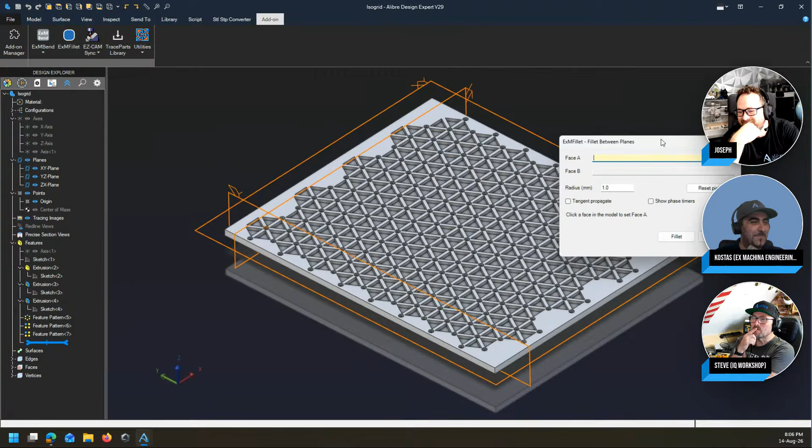Well, it's not, and this is the first add-on I'm going to show you. By the way guys, please do not judge - these are all vibe coded, right? This is Costas vibe coding with Claude. The way this works is you open it up, this is pre-selected, you click on a plane and it selects it, the yellow bit goes down, and you click on another face. Basically you click on faces and it creates planes out of them, then you give it a radius, and then you click fillet. What it does is it creates planes out of those two faces, and it only fillets edges that start at plane A and end at plane B, and ignores everything else. Every other edge gets ignored. And the selection strategy is mine, it's not Claude - Claude made the code.

It ran for about 45 minutes for this fillet. It didn't work really well.

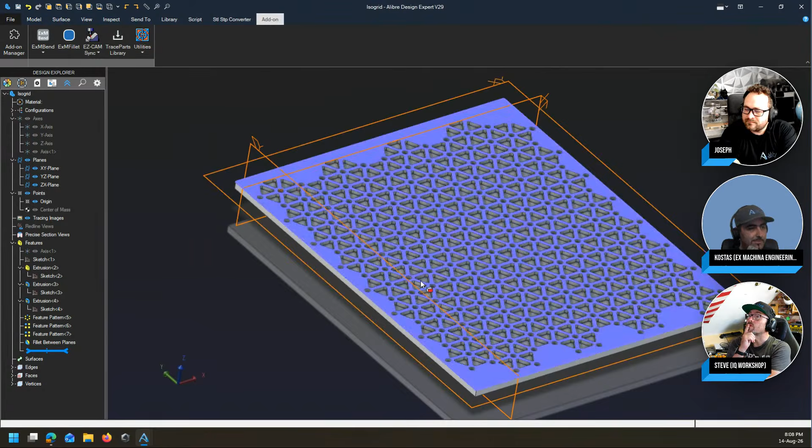Yes, molds, of course. And then you can do multiple passes and select different planes. But for most basic molds, this will work like a charm, and we get to showcase it with a cool isogrid.

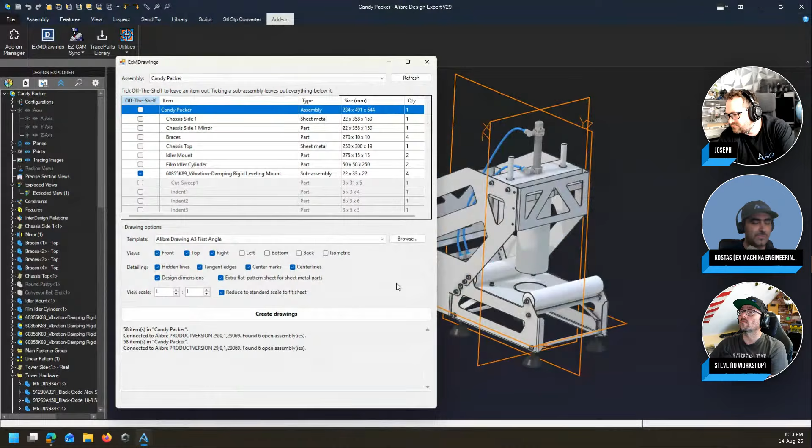Go to general, you have this, which is treat as part in bill of materials when used as a sub-assembly. So for all of the parts that you've toggled this on, this add-on knows and designates them as off the shelf and doesn't make drawings about it. If you want, you can revert that, and then the constituents of that sub-assembly become available. So I'm telling it that all of these are off the shelf, I don't want...

Okay, this is an entire sub-assembly. I don't want to be making drawings of these. These are the pipes, right? These pipes were made with the same method I show in my 3D Sketch Masterclass.

So I tell it what is off the shelf that I don't want to have drawings of. Then I click Create Drawings. And we're streaming, so it might also take a very little while.

And while it takes a while, we've got someone from Eastern Washington. You know, my wife's family is up in that area, so it's near and dear to my heart. Welcome to the chat from Eastern Washington.

So, Costas, what is the target user for an add-on like this? If I'm terribly honest about it, these were made to speed up my work, to speed up the way I work and I produce work and deliver to my clients.

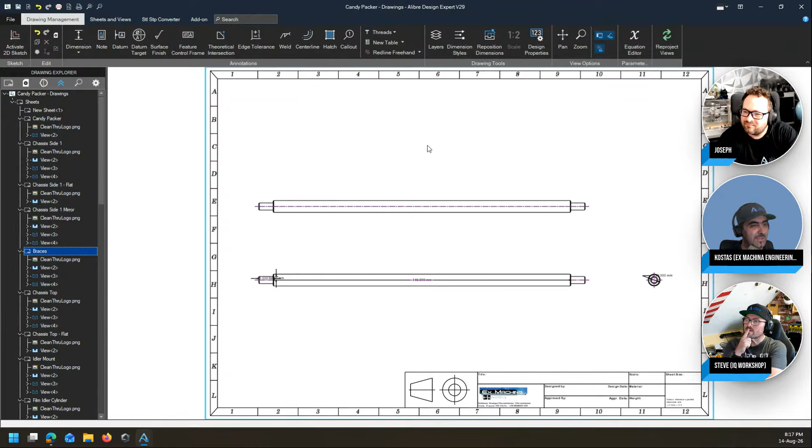I forgot one. This is an off-the-shelf part that got made, but so the idea, the way it makes it, is you get the assembly, and then you get parts. And then when you have a sub-assembly, it makes the sub-assembly and then its constituent parts, and it moves down.

And this scale function has never failed me yet, even though, funnily enough, the dimensions don't go in very correctly, but you can see that the scale it selected is correct to fit the A3 sheet that is my template. And this is the 3D part, and this is the flattened part. Okay, and it goes on, and yep, there you go.

So that is the drawing add-on, right? And just to give you an idea, I'll be making a video, which is, by the way, already made and uploading about this add-on. This just made, in the span of our discussion, made 26 sheets of all of the parts with design dimensions.

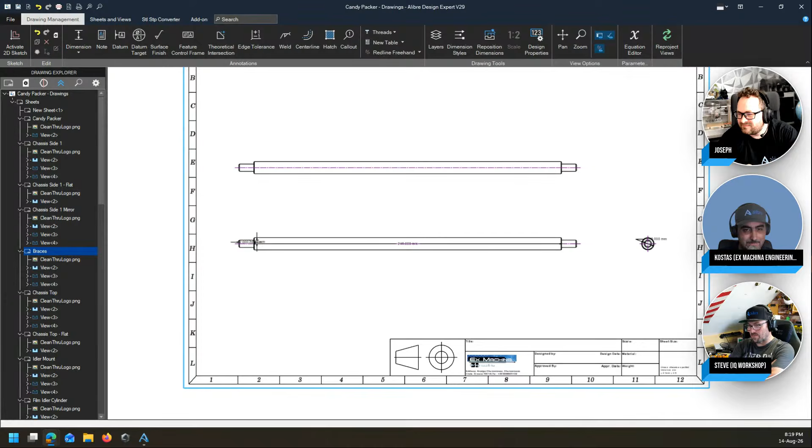Okay, so I mean, it's worth something. Wow, right? So you were saying V25 and above for Alibre? Yeah, V25 and above. Now the only reservation I have is this.

It prints the bend notes, and bend notes are a V29 feature, but these were not put in by any sort of code that was generated. So I'm guessing that if you use this in V25, 26, or anything, these will just not appear because they're not there.

But I'd love people to give it a go, give it a test drive, and come back with comments, and help me make it even better for them and for everybody else that is going to be getting this add-on. Okay, so just to close out the version question, Costas.

So yeah, is that Atom, Expert? Right, so that's a very good question. Atom does not take add-ons because it doesn't have script, and the API are not, to my knowledge, enabled in Atom 3D. So this is a Design Pro and Design Expert. I don't know if Joseph has any more insider knowledge on Atom 3D getting add-ons, but yeah, so this is how this works.

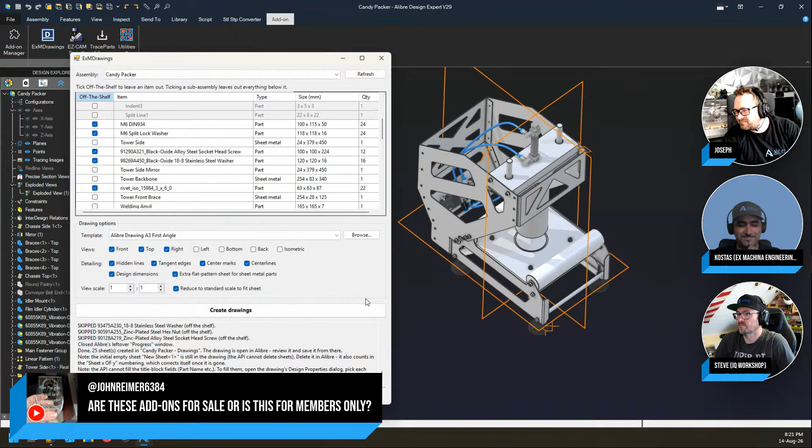It appears that it's slow, right? But in order to make 26 sheets and adjust the scale on them, that's about half an hour of work. Whereas this took like what? A minute and a half, 2 minutes. For 26. Okay, then we had a question: are these add-ons for sale, members only?

How would you structure that? Okay guys, these are not for sale, right? So I'll be building up a catalog of these add-ons. Currently there are 3. The third one is la pièce de résistance.

You sign up for a top-tier membership in my channel, and you can download the entire catalog. Next month, if you don't want to sign up, you get to keep what you already have. If there are new add-ons next month, you won't have access to them, but you might wait a few months and then get the new catalog. These are a bit of work to make, but I felt like they actually add a bit of value, and I also wanted to help people. So it didn't sit right with me to lock it behind subscriptions and stuff.

You sign up for the top tier membership and you download the entire catalog. There are 3 tiers. First tier gives you 1 week advance videos. Second tier gives you any resources I use in a video, so spreadsheets, PDFs. I have a zip file uploaded for tier 2 members, and it even has an entire dissertation on cutting forces, which is pretty deep if you want to go into that - cutting forces in milling, to be exact. But that's the idea: you sign up for a month, you get what is allowed for that tier. And if you don't want to sign up ever again, cheers, you helped me for 1 month. I appreciate it. You get to keep everything.

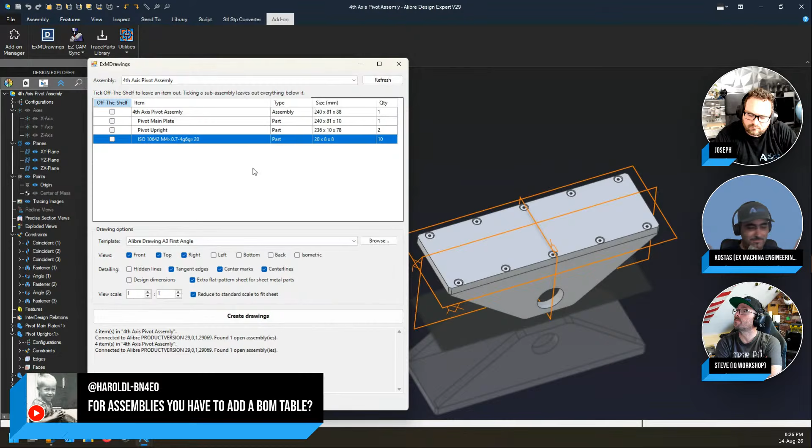So what my add-on does is, and this was 3 parts - you see, it flashed like instantly - it selects this off-the-shelf checkbox when you have checked 'treat as a part' in the bill of materials, but it is a pre-selection. You can go there and deselect it if you want as well. So nothing is final.

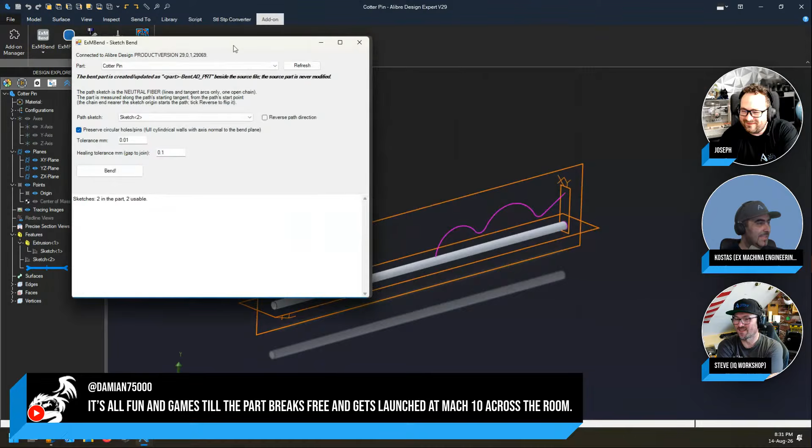Okay, so it's got a few options.

Most of the time, you run it without touching anything. It picks up on the two sketches available in this part. The pre-selection is the last sketch, sketch 2, which is this free sketch. You get a tolerance and you click bend. Then you wait a while - admittedly, not that much. I love the exclamation on that button, it gives the whole thing a touch of personality.

Oh, where's my... okay, it keeps bringing up my screen, guys. So give me a second. You get a little message box saying your bend is complete, and I need to regenerate.

This is our part, bent. But that's not really impressive, is it? So let's push it a little bit further.

Let's go ahead and take this SBR rail - yeah, this is the one I want. This is a production one, I don't want to mess that one up. So this is an SBR rail, right? It's got counterbore holes, so this is a shaft rail, a shaft guide. Yeah, there you go.

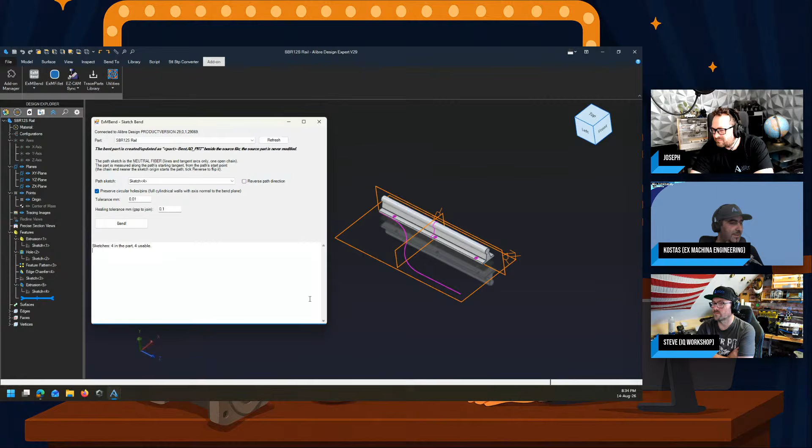Okay, so let's think about this. If we bend this, the hole here is going to get twisted all out of shape, and it can show the holes twisted - it becomes like a triangular hole. But you might want this bent, and you might still need it to be bolted down somewhere. So there is a toggle here that says preserve circular holes and pins, full cylindrical walls with axis normal to the bend plane.

The bend plane being the plane of the sketch that we're bending around. So this is sketch 3, the free one - I need to be bending around sketch 3. Let's see what it does now. Sketch 3, okay, and I'll bend. So this we are streaming, it'll take a slightly longer amount of time, but you'll see there are added features here. Okay, we're bent - let me show you the result.

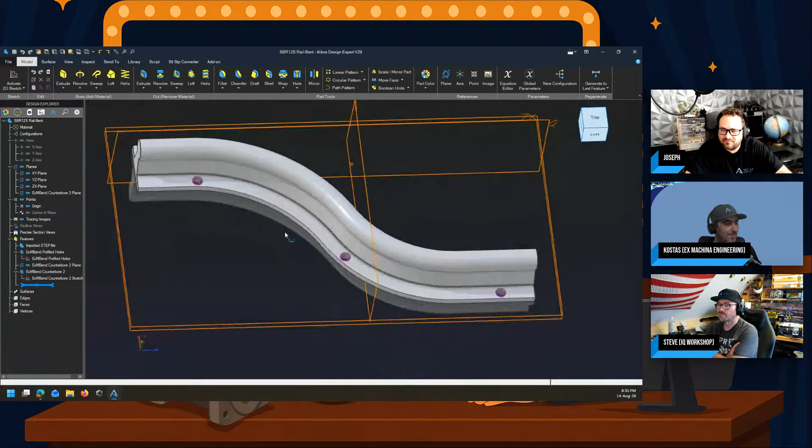So what it does is it bends the centers of the holes, and then it goes in and remakes the holes with features. So there are two cut features here, and you get your bent part with the holes correctly placed. So if I get you - you're making holes that are not distorted in the bend.

Yes, because otherwise, exactly - the way this works is it is a volumetric bend. That tolerance you see is the distance between points; it turns this into a point cloud, essentially. And then it goes in and executes a homogeneous transformation on each point, translating its coordinate system along the sketch, and that's how you get this.

If you do that on the points of this counterbore, for example, it'll be like a slanted ellipse. But by clicking that toggle, you tell it to plug that hole first, remember where the center was, do the bend, then make new holes.

Okay, and we have more. And we have more, guys - you have more? Because we have more. Please, sir, can you have some more? Yes, don't mind if I do.

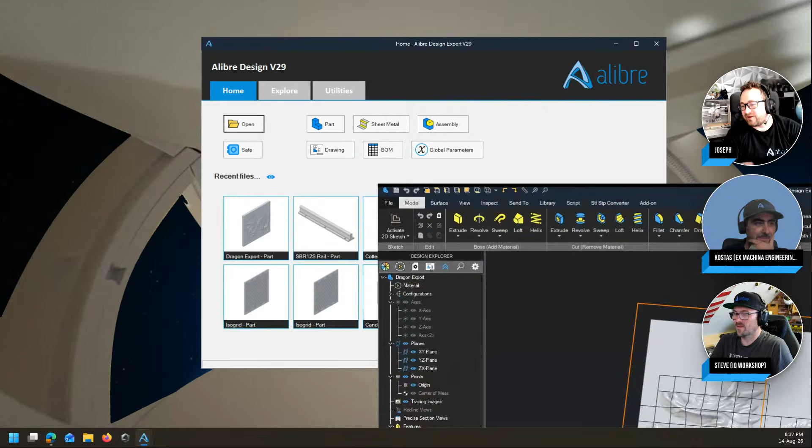I have some videos on the Alibre channel of how to make a tire - we're obviously making the tire in the round, and I think I made two different methods for that. It's a lot to account for features on that circular path, so I think what you're going to show us is a real treat that solves some of these problems. Yep, that's the entire idea.

Okay, so let's go for - where's my... don't tell me I deleted it. The joys of round, the joys of live things. Yeah, here's a question: can you make this into a flat pattern after? That's kind of an interesting thought.

What do you mean? Make what into flat pattern? I think what they're saying, and John Reamer, correct me if I'm wrong, is if you have something that's in the round, could you flatten it using the same logic? Yes, if you get the math right.

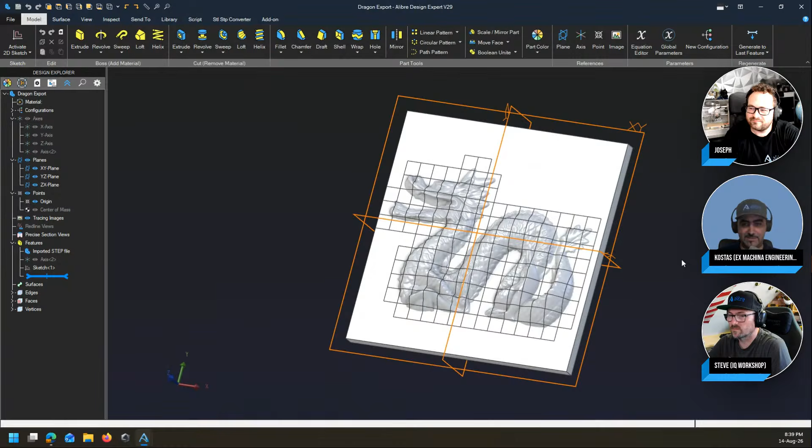Let me point out again that this is essentially an approximation, right? What you're doing is you're creating a point cloud. You're transforming every point in that cloud, and then basically the add-on remembers the engine, as it's called, remembers which points go to what faces and tries to restitch them. So this is not as accurate as the flat pattern in the sheet metal environment.

Let me tell you that flat out, and you will see it in this particular example, right? But I cannot find the tire, so I'm going to do it live. Don't worry, guys.

This is setting the bar high. Difficulty set to max. It's like that one clip. We'll do it live. We'll do it live. Yep, there you go.

Okay, I need this. Let's bring this in. Let's mirror this around this. And we'll do a shallow one. This is not going to be a beautiful tire. It's going to be a tire, right? So I will now thin extrude this.

And let's say that the depth... So this is the length of the extrusion, right? Now, for this to work, this obviously needs to be the circumference of the circle you're going to be building, right? Okay, and after the live I'm going to actually find the tire.

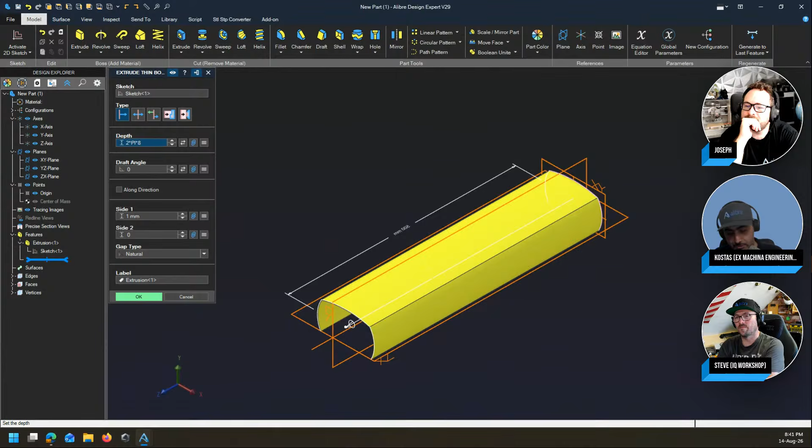It'll be right on the actual tire files. But anyway, let's make a 16-inch tire for a 16-inch wheel. So we have 2 times pi times 8 inches, which is the radius of a 16-inch wheel, right? And then let's make it 10 millimeters thick on the outside. Oh, that was the inside. So that's 0 and that's 10.

Right? Yeah, that's right. And let's fillet these so they look a bit more presentable. 20 maybe should be nice. Yeah, okay.

So now I'm going to make another plane and I'll make it tangent. There you go. And I want the other side tangent to the other side. There you go. Okay, and it's not going to be as beautiful as the sample I sent to Joseph, but let's go, it's a slick.

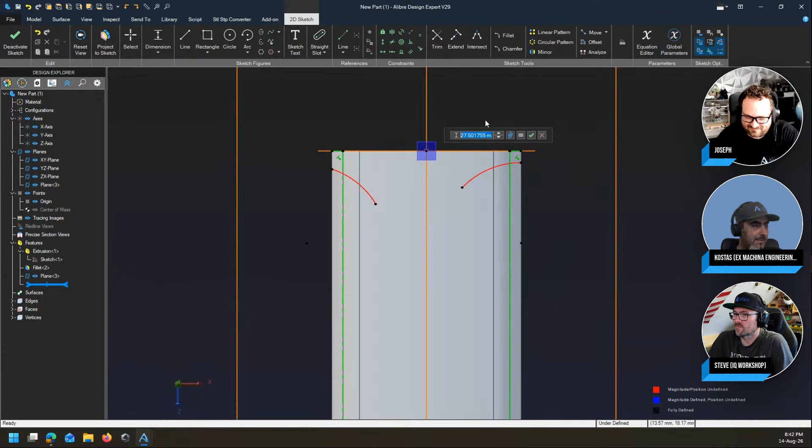So okay, I want to bring these two in. Bring this face in, bring this face in, and I want to make an arc there, and let's make them equidistant from the center. So this is basically a semi-slick, right?

Because semi-slicks have fewer things that I need to design for this demo. Okay. And these two are equal, and they're staggered at 10 millimeters. And this starts...

Oh man, I'm trying to make it fully defined. What's left to define? Ah, the centers. Okay, that's one center. Where's the other one? I see it, it's just right there. Your mouse was on it. There you go, yeah.

So, oh man, okay. So now I'm going to simply do a thin extrude cut, right? And I'm going to go up to this surface and offset it by 2 millimeters. Is that the offset? Oh, it goes to the other side of the surface.

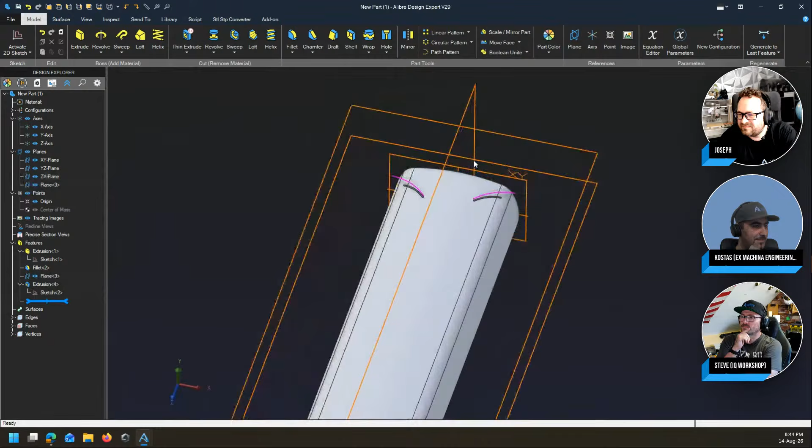Yeah, let's do it like that. Let's make this 2 millimeters. Yeah, this could be a tread, couldn't it? Yep, yeah. Let's be a bit more, let's be even more cheeky. Will it do this? I'm just going to leave these like that. Is it going to cut that? It probably is going to do it, isn't it? Yeah.

And let's get that a bit deeper. Minus 9.5. This is a tutorial of how to make a tire now, you guys. Well, this is the definition of a flat tire.

So guys, take a picture of this, and next time you're late for work, you can send your picture of this to your boss and say you got a flat tire.

How do you get the D's to show up in the measurements? That's a good question. Okay, let me just fix this and I'll show you exactly how I did it.

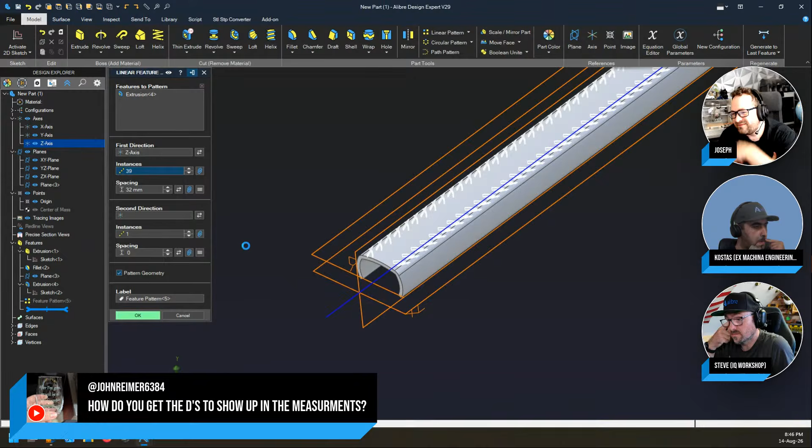Yeah, that looks good. Okay, so how did I get the D's to show up in the equations, right?

So we go into File, System Options. It was System Options, wasn't it? Display, part assemblies, design, viewing. Let me see. It might have been. Would it be under sketching? No, you know what? It was part data. Units. Yeah, you go to units, right?

Dimension, there it is. So part data, which you can also access through file properties. It is this checkbox, show equations. When you tell it to show equations, it also shows the name of the parameter, which is super, super helpful, right?

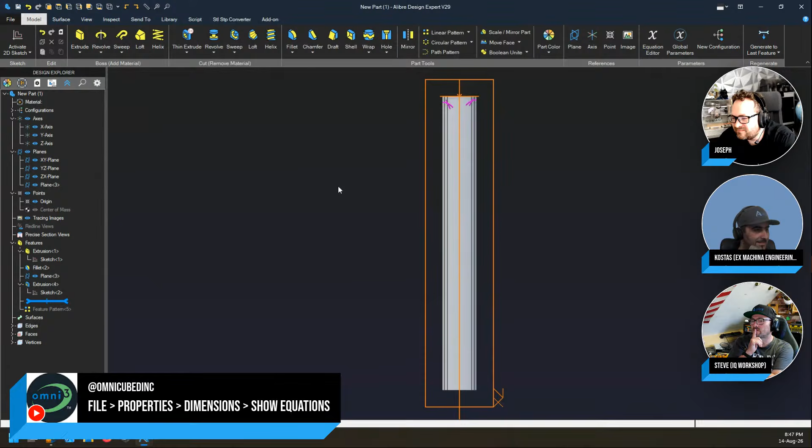Okay, so let's say that this is our tire now. No guys, stop me, this is enough design, right? Okay, so this is our tire. Now we're going to go into this plane, and I'm going to make a point.

So I just started the sketch in the perpendicular plane. I'll make a point here. I will go and project the lowermost edge, and I'll use midpoint with 3 points. So the first 2 points define a linear segment, and the third point is forced to stay on the perpendicular bisector of that linear segment, right? So this is exactly below the middle of that linear segment.

And then I just tell it that this distance - wait, sorry, give me a sec, I got a new keyboard and I'm not used to it yet - is exactly 8 inches. Why 8 inches? Because that's the radius we're designing to, okay?

And after I make this point, I go and click down here where it says insert axis from sketch. And I'll select this point, and what it's going to do is create a reference axis that's perpendicular to the sketch plane, going through that point. I'll apply, close, and close out the sketch. And you see now, I've got an axis here, okay?

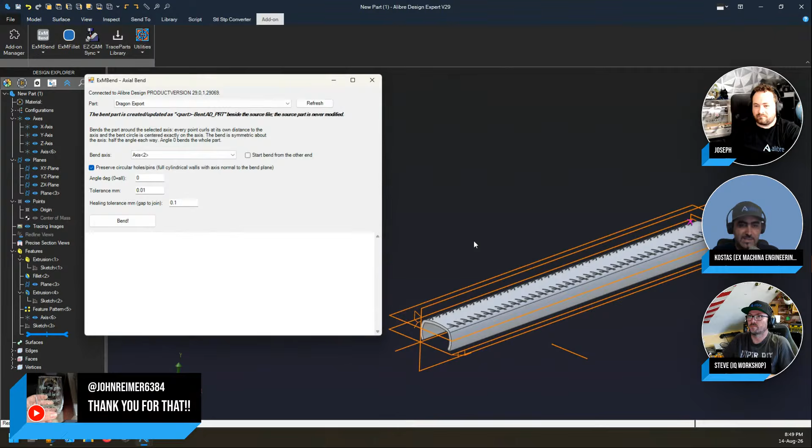So let's go into axial bend, okay? This is a different paradigm - it doesn't bend along a sketch, it bends around an axis, okay? And you'll see that it doesn't take a radius or a diameter as input. That is because the location of the axis defines that radius, okay? And if you leave the angle here to 0, it'll do a full circle.

I can uncheck that, make it slightly faster because there are no holes there. And if I have it checked, it'll check anyway. Let's go, let's see what happens. Did I make a nice tire?

So my demo for this didn't go well, so I'm a bit anxious, guys. All right. Feels like we're spinning the roulette wheel on this. I'm on black, okay? It is kind of like that. It definitely feels like that. It looks like we're bending the dragon. That has to be a euphemism for something.

No, the selected part is the dragon export. Oh, I did, yeah, thank you for that. That's a euphemism for me making the wrong part. Which is a great catch, because up there in part, it gives you a drop down of all the active parts.

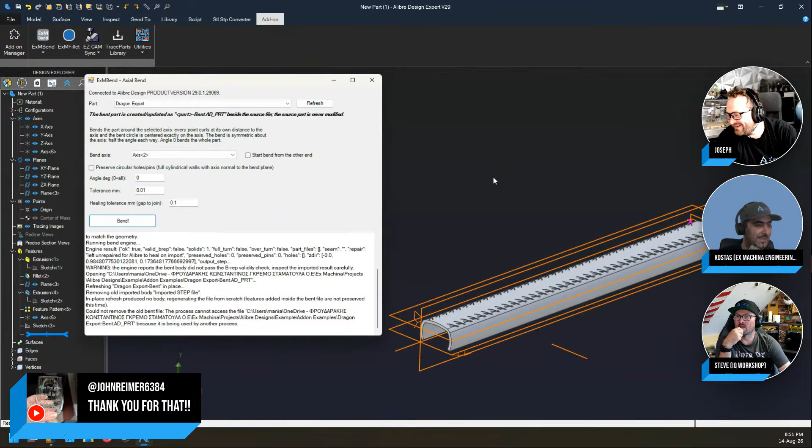Well, if anyone was wondering whether or not we're live, I think we just confirmed we are. We are live. When everything goes horribly wrong, we're live. This is how we do it. But easy fix, right? Just don't get easy tired - fix. I'll rerun it, and then we'll have the dragon example ready made, right? So guys, really sorry for that.

Now I'm intrigued by Bill Black, because Bill Black is from Florida and he's got this really awesome treasure salvage business. And the comment spells tire the way Steve would spell it, right, the European way. So I'm interested to know if Bill Black has spent some time in Europe somewhere, because that's a cool comment for many reasons, but it is a nice way to do some intermediate tire patterns too.

Okay, now that we have the dragon ready for our next show, we'll go for new part. You know what, I should probably save this somewhere. So let's go, tire.

The reason that's saving is probably what tripped you up last time, right? Yeah, and the reason is what this does - I need to rerun it now. So what this does is it puts the bent version of your file next to the original.

Full disclosure, these bends are step files because I'm not Alibre. I'm sure they can make it a feature, but I'm just Kostas. So you get the bent part as a step file right next to it. But if you make changes and rebend it, the step file updates, so if that step file is used in a Boolean later on, that Boolean will update. I checked that.

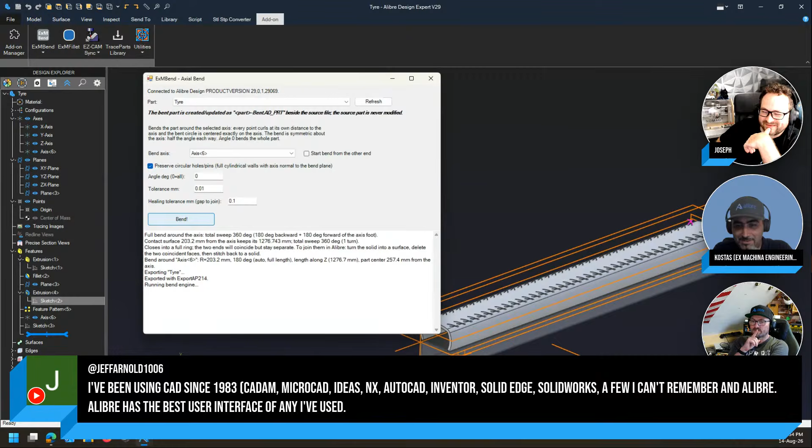Alibre has the best user interface. Yeah, I'll agree with that - best user interface in the business. You know, when SolidWorks started, it was touted as the easy-to-learn CAD. Well, Alibre is like 95% as capable with 10% of the hardness and 10% of the steep learning curve. So definitely worth it.

Okay, we're still running the bend engine. You can't do a live broadcast if everything goes fully to plan - it's in the contract, that's how they get you. It's the fine print, isn't it? It's always the fine print in the contract.

Now we got OmniCubed on with us. I love OmniCubed - there's been a few broadcasts where OmniCubed has come in with some really esoteric knowledge that's been helpful. OmniCubed is at it again, answering that earlier question, if I can find that comment.

We got LGR, oh man, FBS, our regular viewer - welcome onto the stream, thanks for joining us. Hello all the way to Sweden.

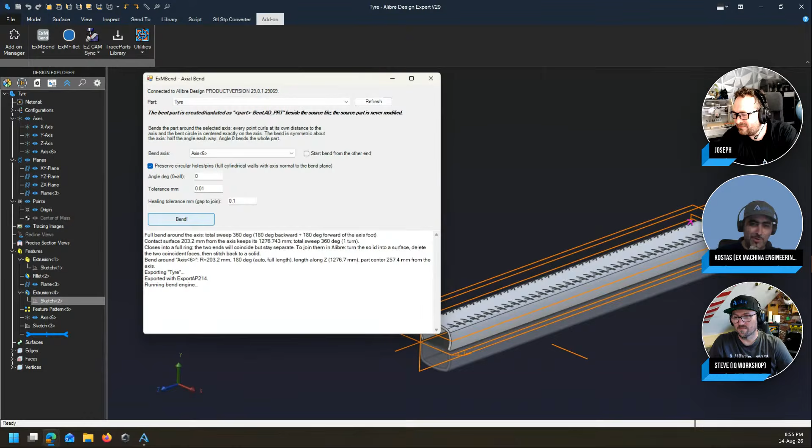LGR FBS made this comment: 'God work.' Sadly, he later corrected it to 'good work,' which I'll take - I didn't see the second one, I only accept the first answer. As soon as you log it in, that's it, it's done, YOLO - you only type that once.

You're saying that about Jeff Arnold's comment, of course, and using that many platforms, it's pretty godly.

Which of course is by this guy - this is the third party. But in this order, you're the second party, right? You're between Steve and I. Yeah, Costas is the meat in the sandwich.

So you see, we messed up because the bend part is created - yep, it didn't work, I made too many things in it. I think we ought to just suppress that extrude cut and try it again. I bet it's probably the cut not lining up or something. Yep, that's it.

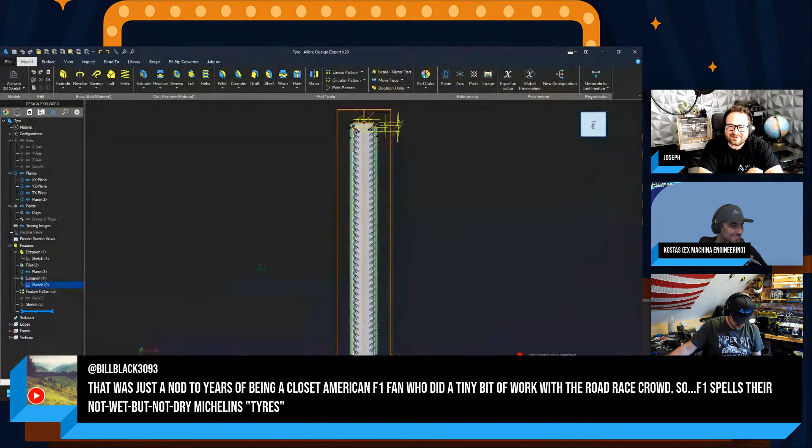So the spelling of tire - we have an answer from Bill. That was just a nod to years of being a closet American F1 fan who did a tiny bit of work with the road race crowd. So F1 spells it that way - not wet but not dry Michelins tyres. And I get it, old habits die hard. I've been to the UK before, and sometimes I still spell things the UK way and have to backspace real quick.

Okay, so let's go to the pattern and make sure that the pattern is right. So let's go like 50 here.

Okay guys, these add-ons are inspired by what Creo does, calling it spinal bend and toroidal bend. I can tell you that you get the exact same issues there, and they're kind of unavoidable, because what we're doing here is some really weird approximations.

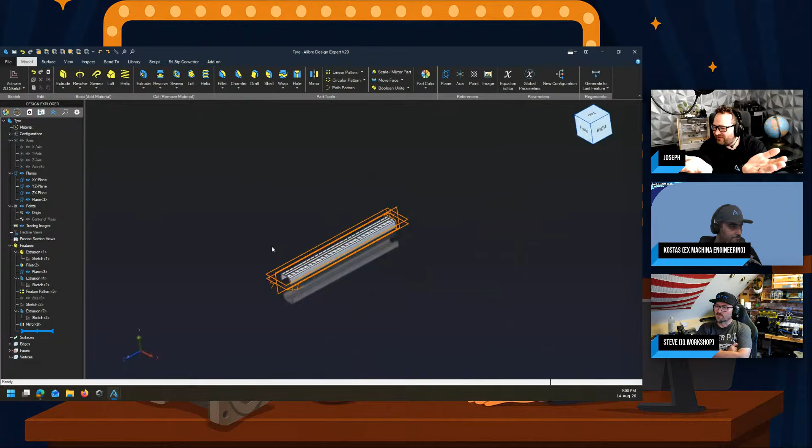So we're doing some really weird approximations, right, and things happen. So let's do it like this and then mirror this, and this should work a lot more reliably. Well, this is pretty fun to see, because when you watch people troubleshoot who have a lot of experience, you can get a lot of things out of it. So it's a lot of fun that way.

Let's try that again. Okay, so we want axis number 6. Let's bend it. Let's bend it like Beckham.

Love that exclamation point on the bend, that just gives the whole thing personality. You know, these were vibe coded with Claude, right? So as I was testing, I told it to make the button there and bend, and I used an exclamation point, it's AI, and it went and put the exclamation point there. So it did what you asked it to. It did, it monkey paws everything, doesn't it?

Let's see, if this doesn't work again guys, unfortunately Joseph will have to show... yeah, I always misspell catalog that way too. So if this doesn't work, Joseph will have to show you the finished previous tire that I deleted, unfortunately. But actually, this was pretty reliable, I'm pretty surprised it failed there.

Well, let's show the original that I have on file here. It failed again, it failed again. What have I done, have I made a hole in it somewhere? I've probably made a hole in it. Yeah, that's the original, guys.

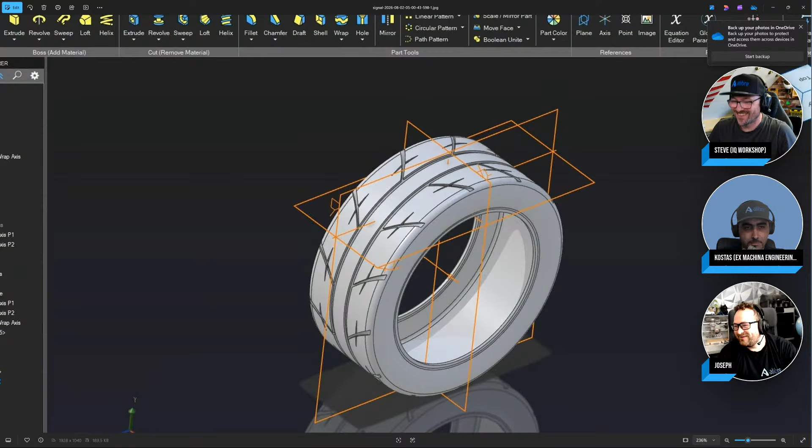So just while we're sorting that out, if anyone's in the UK watching on mobile, you're more than likely fighting right now with your handset because you're getting a UK-wide notification indicating there's a high risk of wildfires. So that's what the noise is coming from, like multiple handsets I've got around me. Yep, I'm literally trying to silence them all. Well, good PSA, don't start wildfires guys. Oh yeah, it's a big problem right now. That's useful.

Well, should we jump into Weldment updates, or do you have some more, Kostas? Nope, I don't have any more. I will be making a very detailed video on how the axle bend and the sketch bend work, and I will address this failure, because I'm pretty sure when I did the extrudes, they were straight extrudes on a curved surface, and I think I punctured the surface somewhere, and the bend closes that hole, and that's where the face count changes and it doesn't match. So I'm pretty sure that's what I did, but I'll address that in the detailed video.

Anyway, that sounds good. And let me tell you, I spell catalog that way too, and sometimes I don't even realize that it's spelled wrong. So engineers may not be paid to spell. Well, if you accidentally get the spelling right, I mean, I'm not going to judge. Yeah, sometimes I spell something and then I type some random gibberish to make sure that it gets the underline because I can't believe I spelled it right. So, yeah, I have a whole...

By the way, can I just address something else? Yeah, these functions... oh wait, we didn't show the dragon. Oh yeah, you want to show the dragon? Yeah, we need to show the dragon, right? Because we actually did it live and then we never showed it, so we need to show the dragon.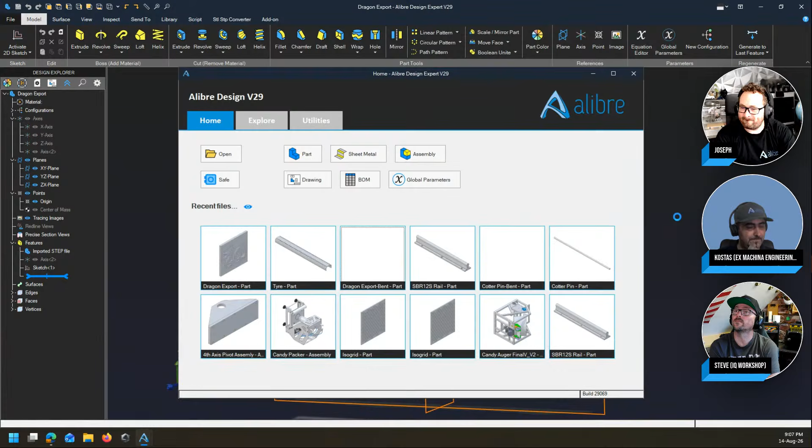So this is the plate, this is a flat plate. If you check this axis out, I need to show my axis. So it's bent along this axis, right? So because the axis is at an angle to the plate, the result becomes a cone, okay? And it just needs to update the face meshes and you'll be able to see it.

You know, in a case like this where you have an image like that, the common thing to do is to make a height map out of it, project that height map onto a bent surface, and then try to use the height map to produce this. So this is a great alternative to trying to use specialized software with height maps.

Yep, look at that cone. And this, I'll be honest, you know where I got the idea? You remember that live where I couldn't make it because I was under the weather a bit, and you showed Relief Maker with Max, right?

There was a question, and he said, 'Oh, can we create a relief on a cylinder?' And Max said, 'Well, no, it's not working, it doesn't work like that.' And I was like, 'Yes, but you can do it on a flat plane, pick up the points, and then do a homogeneous transformation around an axis.' And then I started vibe coding that, and this is what it got, right? Yep, so it even picked up the fact that the axis is off angle a little bit, and it made a cone. So yeah, that's it from the third party.

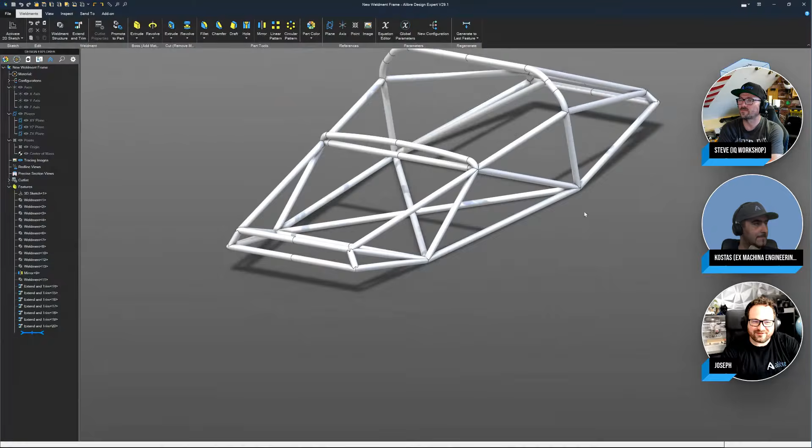So here on my screen, I have some Weldment parts. Here's one frame that I've been working on. Now, we had a schema change since the last time I showed you a 3D frame, so the last frame will no longer open. That's okay, I was expecting that because that's how development goes.

I remade this frame in Weldments. I don't think it's as good as the last one, guys, so if any of you saw the last one, let me know if this frame is totally terrible compared to the last one. But this is what I got right now. And of course, this all came from a single 3D sketch. But this time I made it in half, apart from this one thing that wasn't symmetrical, because now we have some new features where you don't have to 3D sketch the entire thing like we did last time.

This is another frame that was made for testing purposes on the development side. Again, lots of fun to be able to make these. And you'll see some interesting new features - we're going to get into how to make something like this, support gusset, and other things, because there are new features that we have not yet demoed.

I'm going to pull up one other example file. This, of course, was one that I made using the new feature. I know Kostas is really jealous to hear this. In fact, I think I have an even better one.

So let's go into - every time, man, it gets me every time. But yeah, yeah, so go on, go on.

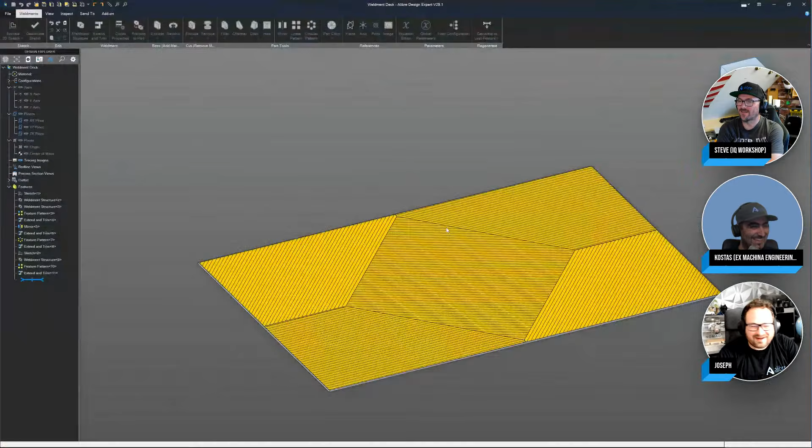I have a deck or a platform that has some patterned surfaces. Just like you, Kostas, I think I had an even cooler version with some little legs and supports, but this one will do. So let's talk about how we can make interesting decks or surfaces like this.

I'll open up a new sample weldment part and kind of outline the general process. First, I can show my planes with Control-Shift-P, and select a plane.

Let's make a deck that has kind of an angle iron outline on it. We'll make it a little bit small so that it's manageable here. I'm going to say 100 - I'm working in inches, but this is friendly to any unit - so 100 by 50, how about. And then we'll constrain that horizontal.

So when I want to add some angle iron, we create a weldment feature, and this works off of the toolbox. You can make a toolbox profile of whatever part that you want to have, and you can make a weldment profile out of that, which is fun to see the updates with.

I'm going to choose an L angle, and I just click on these sketch elements to fill them in with some angle iron. You'll notice now that we have these different points. I can click on a point, and the path that the weldment travels down - the sketch path that I made - when I click this point, the sketch path will be connected to that point now on that weldment.

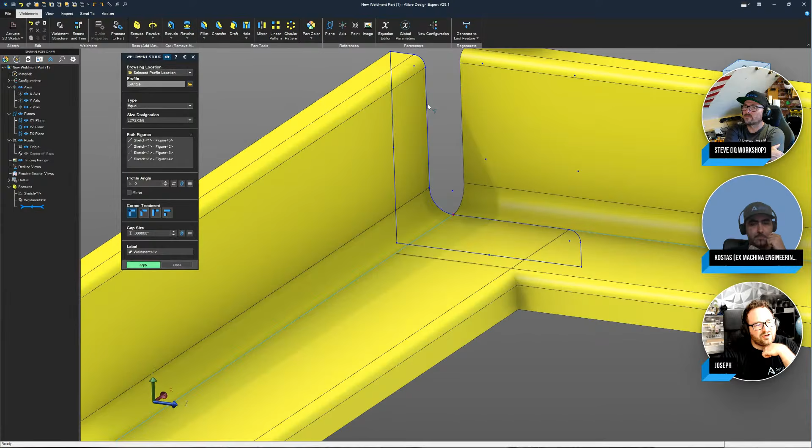One interesting thing that we can do is if we go into the weldment part file - the file that drives this profile - I can add sketch nodes and they show up as these blue dots. So I can add my own custom locations that will be connected to our path to orient this weldment. Let me know if that makes sense in the chat.

That's cool, actually, yeah. So you don't just have custom profiles, but custom locations to attach those profiles to - that is cool. Saw that comment, had to bring it up. Good job, guys. Thanks, Kostas. Thank you so much, guys, it was so much work. Thank you so much, looks like you're going to be getting some subscribers. Be sure to let us know in the chat where to subscribe to. Anyway, a little squirrel moment there.

But so we have the ability to put this profile. I'm going to take the very top face of this flat part and put it right on my sketch plane intentionally, and I'll show you why. We have corner treatments, so we can cut the part so that it stops where it should in the way that we want. I'm going to go with these nice 45 treatments, and we'll apply that.

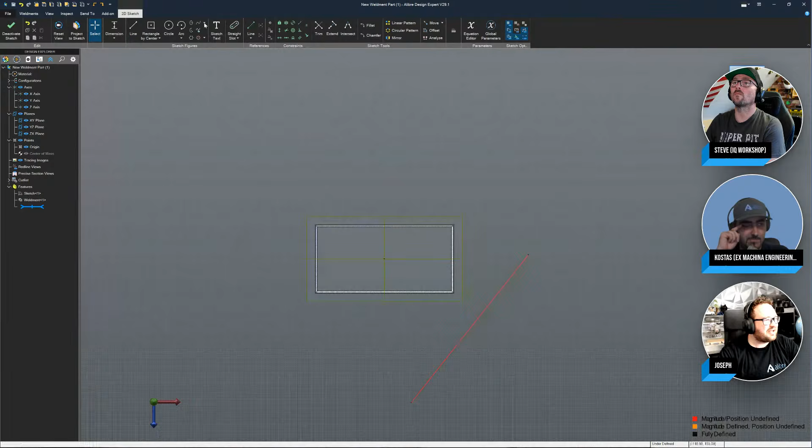Now, what does it look like if I want to use a different kind of weldment profile? I'll activate a sketch on this exact same plane, and let's say I make this somewhat large sketch line, and I'll make that 45 degrees. Yeah, you know what, I think that will do reasonably well. Okay.

I'll make a wood thing since this is going to be like a backyard deck. I haven't actually designed backyard decks before, so if anyone has done that, let me know in the chat if I'm doing a good design or not. I'm totally open to correction here.

I'm going to go with softwood lumber and specify that as my path figure. Clearly this is not the orientation I want, so I can change my profile 90 degrees. Also, something that I don't think was ever shown before, and this might be a brand new feature: I have the option to mirror my profile as well. So we don't just rotate, but we can mirror it, giving us unlimited freedom as to orientation when we create weldments.

That weldment is awesome, isn't it? Can I just say that? It's awesome, it will save a lot of time and effort. I can imagine. Our wood plank is intersecting our angle iron

Our angle iron is intersecting in a way that is totally not desirable. So once again, because I used a point to make that angle iron sit on that plane, I can make this wood also sit on the plane. So I don't have to make many sketch planes or anything like that. We have these options to orient things so we're sitting right where we want to. I'll say okay to that.

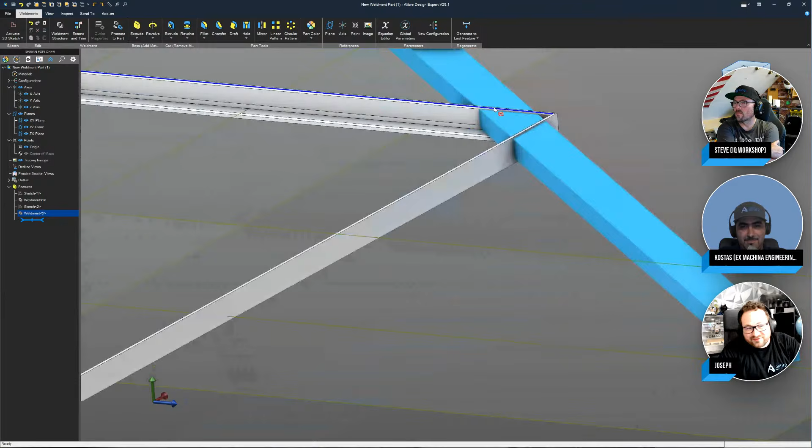Now there's a few ways we can approach this. I think what I'll do is use a trim to trim this plank. I can say I want to trim this body along the plane of this face, and then it cuts it right down to size, right where I want it. This is a brand new feature never shown before: our trim feature can now create gaps, so I can create a known gap between my planks. I'm going to stick with a gap of 0.

But what's kind of fun here... I don't... go ahead. I'm not 100% sure. Guys, if you know, please correct me.

SolidWorks Weldments does have trimming, but you cannot do a custom gap. You need to make planes in those parts and then trim by planes. And even if SolidWorks has it, Weldments in SolidWorks is in the Professional package, which costs like 18,000 euros over here for a perpetual license. So this is a lot of fun - that's 9 times more than an Alibre license.

You'll notice I did not do my homework here, and did not fully constrain my sketch. I'll change the dimensions just a little bit to create a certain condition here. So when I go to reproduce my wood plank, everything looks fine. Let's linear pattern this - this is also a feature never shown before, another new feature in development: linear and circular patterns. I'll take my plank and select this as a feature I can pattern as a weldment, and choose the direction of this edge down here.

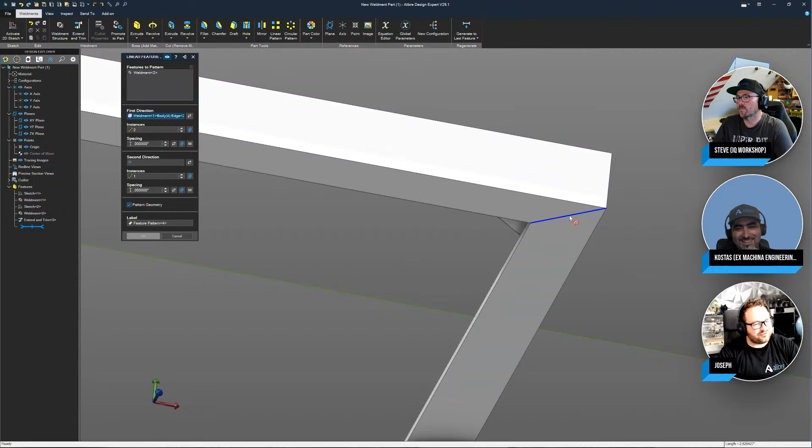I want my spacing to be 3.75, if I remember correctly - yeah, that's about an appropriate gap. So I can start patterning instances. Let's try 15 of those.

Oh man, I think I know where this is going. I'm about to be blown away, guys. If this is what I think, oh man, I know what this is. Oh man, Joseph, I want the Weldments.

So we can accept that, but I can also add the trim into my pattern. Not quite what I was looking for, but let's keep in mind that we can do the trim. There we go - so if I uncheck pattern geometry, we are still trimming on those planes.

Pretty cool stuff. Let me go in and edit my trim, and I can add in perhaps this plane, and this plane. There we go, so we've got something that looks pretty good. I have a few options - I can make my sketch a lot longer so it will be contained within those trimming boundaries I created. But I also want to show you another feature.

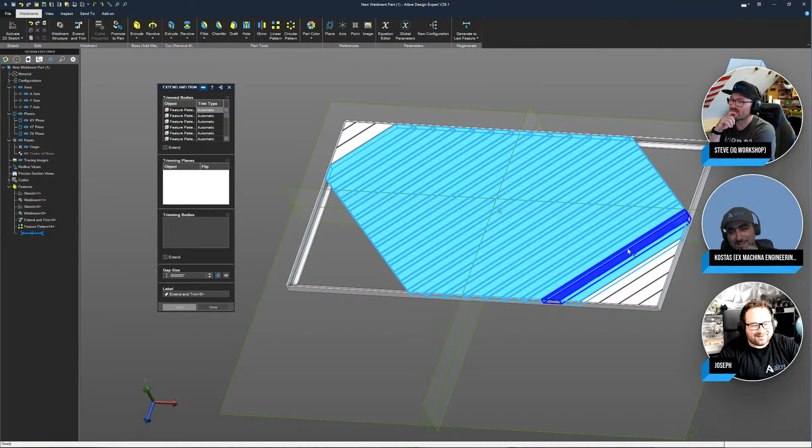So let's do it the hard way. There's an extend option - I can select some of my trim bodies here, and one of the fun and interesting... isn't it great? This is awesome, man, I'm telling you. You've made a table that could sell for quite a few dollars.

Right there, right? Yeah, I certainly didn't go cheap when I decided to use my components. No, you didn't. You did not.

I'm telling it, hey, let's trim these components on these planes. But there's a little Uno reverse card here. I can choose the extend box, and now we're extending to those planes. This really boils down to a multi-body modeling perspective. Alibre hasn't had true multi-body modeling in the past, and we have it now with weldments. So we can start thinking in terms of whole entire bodies and how they can interact and work together in places like this. Very, very awesome stuff.

I'd buy that table. Thank you. I would take the money. Unfortunately, it doesn't exist yet. There you go. Let me check my notes and make sure that I didn't miss anything so far.

One of the cool features is, now that we have a whole bunch of individual bodies, what if we're worried about one of them? I can jump into my cut list, and we can see that we've generated a cut list for all of our unique parts. These highlighted parts all have unique dimensions and are their own. Here we have copies of the same part, and it automatically amalgamates the same part into one item in the cut list, so you don't have to worry about what's the same. It generates a cut list with the quantities that capture those same parts together, saving you some time.

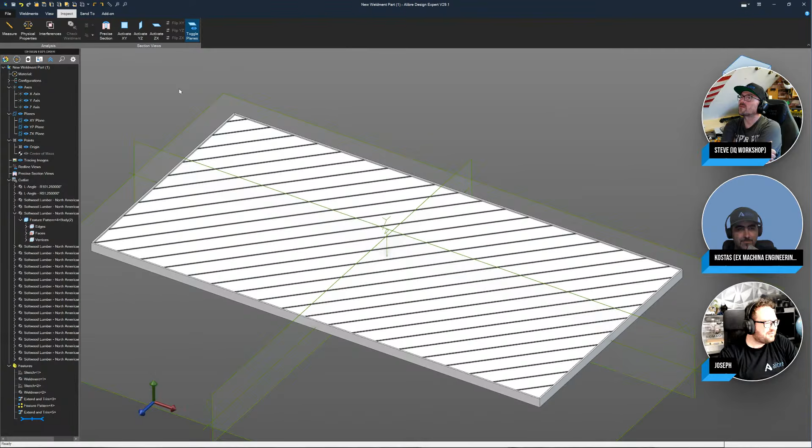I think we still have a check weldment feature. You can just select whatever body you want and make sure that it is checked. This is a development version, so I'm not sure if this check weldment is at maturity or not. We'll see what they come out with, but a lot of cool new stuff coming out for weldments. I think there's a big push to get this released pretty soon, so stay tuned, because this will be on your desktop pretty soon.

This part is pretty cool - this is my favorite thing, if I say so myself. There's been a lot of questions about, well, I love that I can make weldments, but I do need to draw those individual bodies. So we have the ability, this option right here, to promote.

Likewise, if I select a part and go to weldments, there's this new promote to part option. I have to save it, so let's go ahead and save it in my delete folder - we'll just call that a temporary part. With this saved, I can promote this specific body into a part here. They'll say okay.

When I go into there, now I have a driven body, and this is a folder with a bunch of other parts. Let me just filter it by time modified - is it 11? Yeah, it's 11:23.

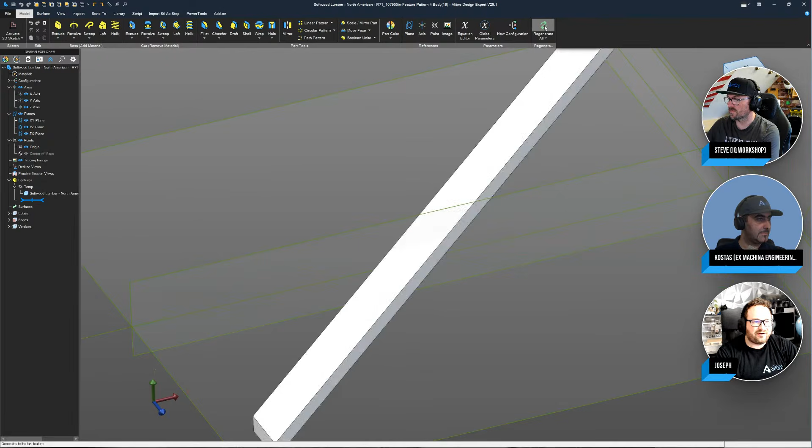So I have this driven body where I can make drawings of it. Now you'll see that it's not showing up here - this is actually a development version bug that has already been fixed, so this is not going to show up for you. In fact, it doesn't show up if you get the latest development version, but right now I'll just hit regenerate all and it shows up no problem. So that is because it's not released.

You're right, we're still crossing our T's and dotting our I's, but we have our individual weldment body. Now, something else that's kind of cool - I can activate a sketch. Let's say that I want to just extrude a hole.

Well, now we can actually do extrude cuts. We have never seen this before in Alibre until this very moment. I can select a target body that I want to apply it to, so I can make this hole apply to multiple weldment bodies - oh man, I love that - or just a few. And when I apply this, I can pattern that hole and so on.

So when I go to promote things to bodies, let's go ahead and promote that to a body here, because this is kind of an important point to make. We'll promote this - oh, and I have to save everything, of course. Alibre is keeping me honest.

So we'll take that body, we'll promote it, and then I have an individual part file with this hole. Something important to point out is this is a driven body. Let's try regenerating it. There we go. So I have my part with my hole.

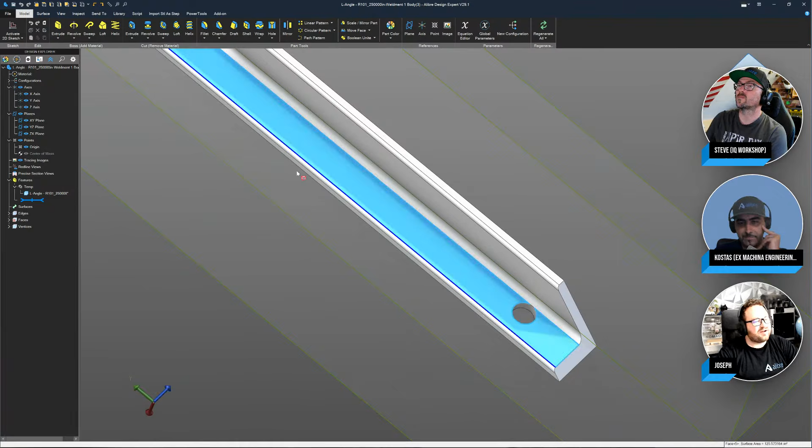I can make a drawing of it. If I were to edit this and make another hole from the part, it doesn't show up in the weldment file. So it's a one direction link. If we make edits to a part, we need to do it in the weldment file.

Now, let's say that I want to make a drawing of this. Well, I certainly can do that. Let's go to send to, make a drawing of this design of my platform or deck. That's probably really quite small. We're going to say yeah, that's good. We'll just make an empty drawing, and we'll say okay to that.

So in Sheets and Views, I can select a view and make a cut list table from that view. This is separate from a bill of materials, so you can have a cut list and a bill of materials all on the same drawing. As you can tell, we have 9 of member number 4, 1 of everything else. So it keeps track of whatever quantities we have and need here. That in itself is pretty cool.

I'm going to go ahead and save that in my folder.

But we also may want to draw our individual components, right? I might want a drawing of every unique weldment that I have. So to do something like that, we can go to Promote Part, but select 1 per category, and it makes a selection of every unique part without selecting duplicates. And then I can create drawing sheets, and it points automatically to the drawing that I just created.

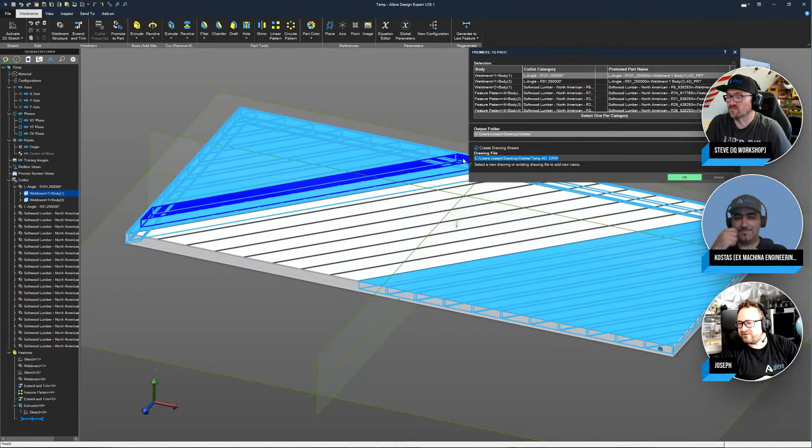So we're going to say OK to that, and we'll see if this works. I've had an error when I've had some overwriting stuff before, but I think it looks like it's working. In fact, in my folder, you can see these files, individual part files, being promoted and written in real time. Fortunately for me, this is an Explorer window, so I can move it to the screen as it's going.

I just got this image of Anakin Skywalker staring at this pod racer for the first time. It's working! Yeah, yeah, it is like that, isn't it? Yeah.

There we go. So once we're done there, let me pull up my part drawing. And I think it's having me do a projection here. So if you can tell, these kind of come up off screen, but we can go ahead and move our view. So now we have drawings of all of our individual parts, which is super cool, right? We can see all of our lumber drawing views, and we can start positioning and dimensioning them as we go.

Way cool feature. Now, I'd also made a promise that not only can we create individual drawing views of all of our individual weldments and keep track of what's unique and what's not, huge time saver there, but we have a frame that had a gusset on it, which is pretty fun. So far, in every weldment demo we've ever had, we've shown how to make weldments out of these profiles and things that are linked to the toolbox.

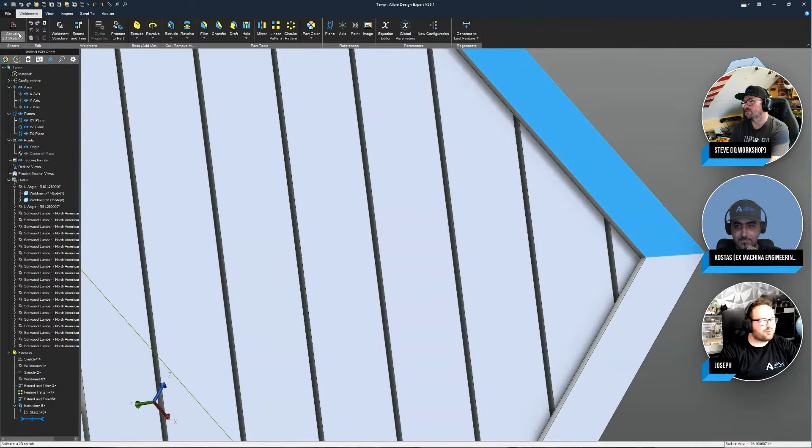So if you want custom profiles, you can use a toolbox part and have your profiles work. But what if I want to make a simple gusset? I'll check the thickness here. So the length of that line is 0.255. I'm so glad that's easy to remember as I'm live. I can create a sketch on this. And maybe I want to have a little sheet metal support gusset that's about a quarter of an inch long, and I just want to model it right in.

So we'll choose collinear, right? Make sure that this line is collinear there and there. I can give this an angle. Make sure my gusset is 45 degrees. We'll go parallel, thank you for being patient with me as I do this. And then I'll just give it a final dimension.

All right, so there's my support gusset, and I'll extrude it. I'm actually creating a part from a sketch in the Weldments environment. We'll say a depth of 0.25 here, and reverse direction. And what we'll find in the tree is that I have this extrusion that I can roll back and roll forward, just like in a regular part environment.

In our cut list, we have item number 24, and this comes in as a weldment not generated from an Alibre toolbox profile. I can even promote this to a part, or I can check the weldment. Over here I can add properties like material and names as a cut list item. Really cool that we can make gussets and other items through multiple ways, through a toolbox profile or just by sketching.

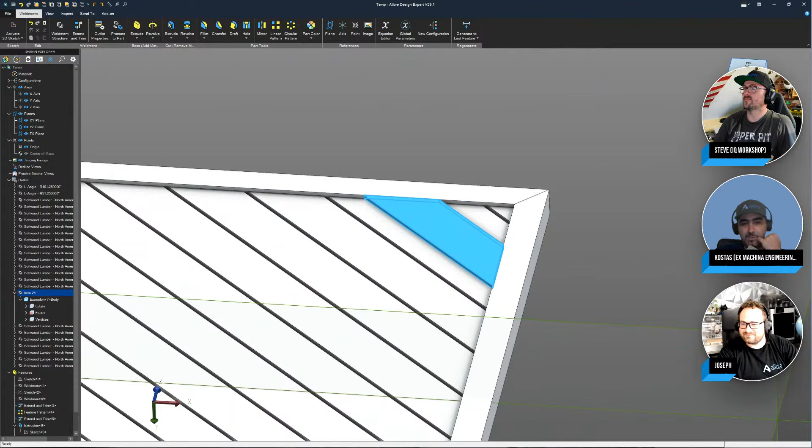That should give us a profoundly higher amount of design freedom. But that's not just weldments anymore, man. I think it's a bit beyond what I was introduced to as Weldments by SolidWorks, essentially. So that last example there was awesome.

One question there. So let's say you take that and put it into an assembly, and start making drawings. Is that treated as a single part, or can I just bring that into a sheet? Do I need to promote everything before I make the drawing? That's what I'm asking essentially.

Yeah, great question. So here is a part in an assembly, right, a weldment file in an assembly. Let's send it over to a drawing and see what it looks like. I'll save my assembly, and then we'll go to make a drawing.

And I thought I saw another question about whether we can edit things on the assembly level if they're weldment parts. So let's cover that as well.

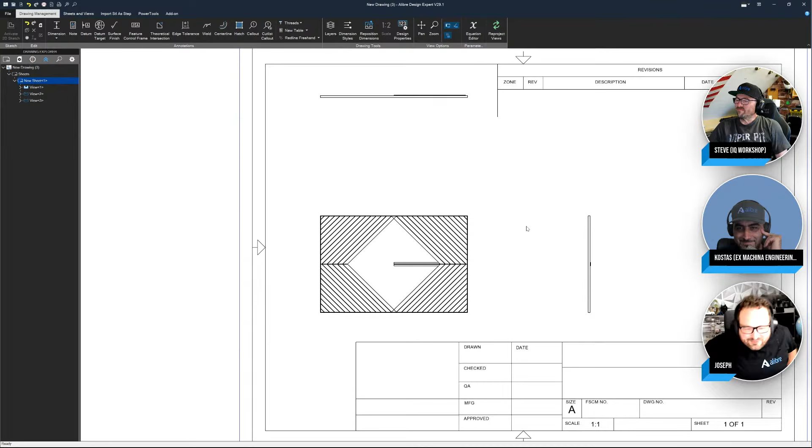So yes, when it comes to making something in a drawing from an assembly level, we still have the ability to create a bill of material. We'll create a new bill of material here, and of course this comes in as just a weldment part. If we want to break down that weldment part, that's where we have our cut list.

I think you might have to make a cut list table and import it. I'm still working through some of these finer points. So back to that question about editing things in an assembly, we can go to our features, activate a sketch. I think this is what Simon B was asking about.

Yeah, we can make an extrude through our assembly. Again, this is a development version that I haven't personally pushed this far, I'm kind of just winging this live. So I think there's still some further development going on here, but I'd expect to be able to edit these things on a full release. It doesn't look like it wants me to select target instances yet, so stay tuned on that, because I think there's still some development work going on for assembly weldment editing here.

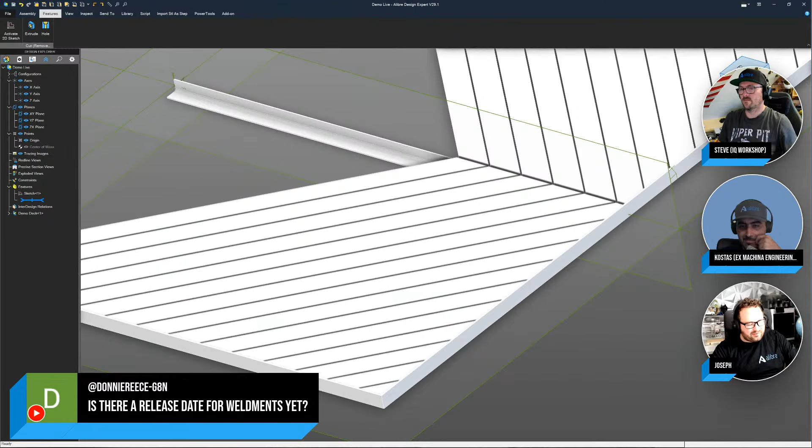Let me check some questions here. Is there a release date for weldments yet? Not a date set in stone, so it's going to be that same stereotypical answer, but it's going to be pretty quick. From what I see with people talking, this is really wanting to get out the door fast. So in the next few weeks, probably even sooner.

So can you bring in some? Yes, go ahead. No, go ahead, finish with that, and I have another comment I want to highlight after that.

Absolutely. So as far as Simon B's question goes, stay tuned on what I just did with assembly level features, but hopefully you've seen you can make holes through multiple components on the weldment level as well.

Spencer Constance says it would be cool if the cut list would automatically tell you cope angles, diameters for tubes, and that sort of stuff. Diameters for tubes, I think, is basically the name of the profile, so it would tell you that. But cope angles, that sort of stuff, if that was in the cut list, that'd be awesome. I haven't seen this new feature yet, but if they've done all that work to weldments, I'm sure we'll get that in the cut list as well.

One thing I can say for sure is there's going to be a lot of ears open on this release, and I think we're going to be heavily listening to what people want to see feature-wise for weldments moving forward. I think there's going to be some enthusiastic feature development. So if you have ideas like this, post something on the forum with a feature request and make sure your voice is heard, because a lot of people are listening for really cool features like that. Don't ignore those cool comments and ideas, let us know.

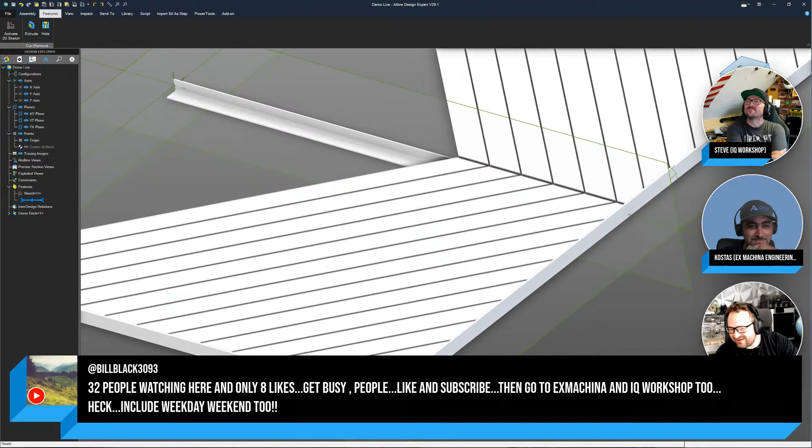Simple to check. Spencer, thank you again for these ideas. We love your ideas, so make sure you keep chatting about them, because we're listening for what priorities users come back with on what's most important. What do you want to see added? What are we doing well? This is, I think, a particular release where there's a lot of ears on this.

All right, anything else I can show you guys? Any other questions? Did I answer that? Someone asked how you would make that race car frame, or if we have a video about it. We don't have a video about making tubular frames, but I can show you.

This is an example of a tubular frame, and I think I might be able to scare up one other example - I accidentally opened another version of Alibre. Give me one second here. Okay, so I have two examples here. I think this is a good part to have around because it shows different ways of making things. So I've got a rack and I've got a tubular frame.

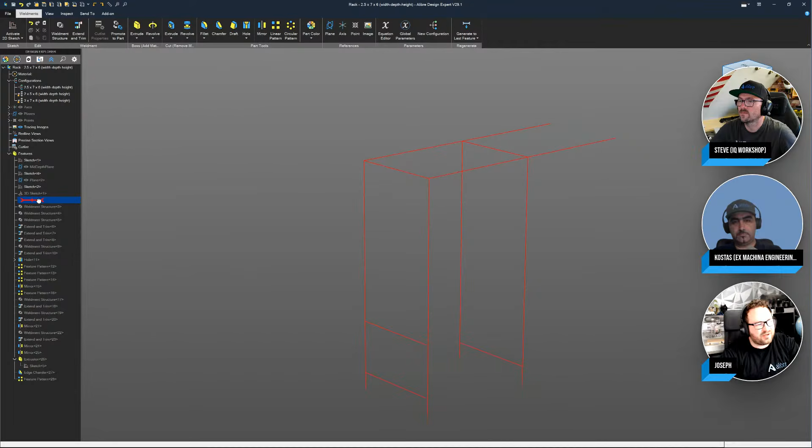This rack was made very interestingly - if I show my sketches with Control-Shift-K, I'll hide my planes to clean up the environment a little bit. We have two sketches, another 2D sketch, and we have a 3D sketch. Through this network of 2D and 3D sketches, we were able to create weldments throughout the history. So you can make a bunch of individual standalone sketches and have them come together to make something meaningful like this. Likewise, if I roll this back, this is one single 3D sketch to make this frame.

So pick your poison - you can make it however you wish, and then generate individual weldments off of that. The idea behind making weldments in a frame like this, or through individual sketches, is once you have this, when you make a weldment feature for a frame like this, if I select something like this and say I want this to be say 1.5 inches, schedule 40, we'll go with a pipe - schedule 40, 1.5 inches, let's say that's the frame I want. If I go to select this, it doesn't select, right? So the idea is when we select these weldments, they either need to be parallel with each other - I can choose anything that's parallel, or I can clear my selection and choose anything on a contiguous path. Those are the two options for selecting weldments.

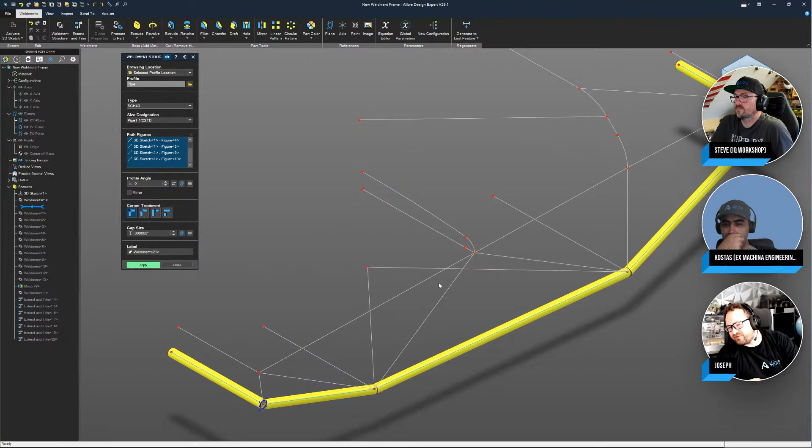I was asked about a video about making these tubes. We don't have one, so I'm kind of doing one live. We can also look at previous live streams. Maybe I'll be busy going through this, but if someone can link a previous live stream in the chat, that's great, or I can do it later.

When we see these pipes overlapping, we can change the way they connect with corner treatments. I love this—it's almost always watertight. Sometimes physics doesn't allow a completely watertight fitting, but so long as it does, they're watertight here, or we can do these kinds of corner treatments.

So then the question becomes: when I generate a subsequent weldment, there's no actual corner treatment that changes this, because this weldment has already been generated, and these corner treatments only affect the weldment I'm currently making. That's where our trim tool comes in.

We can do an extend and trim, and say I want to trim this body across these bodies. I can even create a little gap if that's important. So we have all the options to get that corner treatment—it just comes after the fact with a trimming body, and I think that's pretty typical.

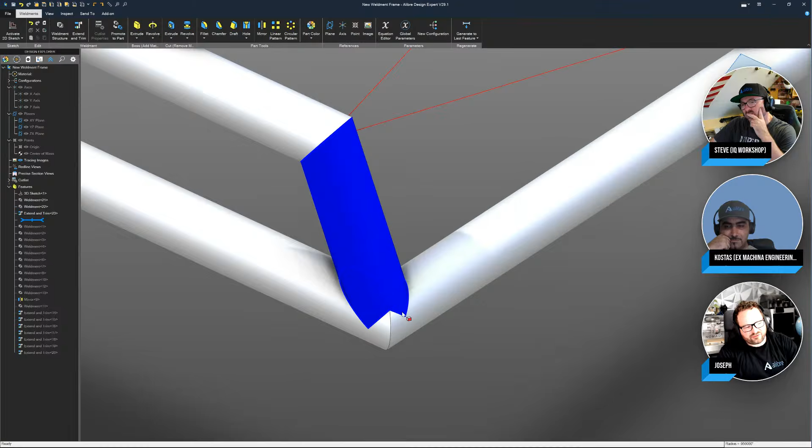So that is how we would start generating these kinds of tubes and trimming things to the right size. Then, if we need to, we can promote this to a part and make drawing detail about what this fish mouth or corner treatment might look like on our frame member. Let me know if that answers your question, or if you have additional questions about working with weldments.

Am I still on? Yep, I think we're still on. For some reason it froze. We're still good—I could not see myself. I think I pulled up the wrong browser, but it was still on our streaming platform, so I didn't see myself, and I thought I was just talking to air for a second. No, we would have noticed that, but Wave Video is still holding on. Let's see.

Yeah, this is an interesting one. This is the chassis we designed in SolidWorks. I haven't done much in weldments recently, but could get my engineer to make a list of pain points or features SolidWorks weldments is missing.

We'd love that—Joseph at Alibre.com, you can send that directly to me. I'd love to see it and forward it on, because I think weldments are still slated to have some improvements. That's golden feedback right there, man.

It is golden feedback. Let's do a quick mirror, just because I haven't shown that—I can choose different weldment bodies to mirror, and it takes the work out of trying to 3D sketch that like I did the first time through. So, very welcome adjustment there.

That's pretty cool. Now, did I miss any comments? Let me know. Oh, here we go: difference and similarities between using feature patterns and topology patterns. Really like that—thank you guys for the reminder. There's a little bit of a delay there, I'm sure you sent that right away. So we kind of covered that in the previous, if you don't mind.

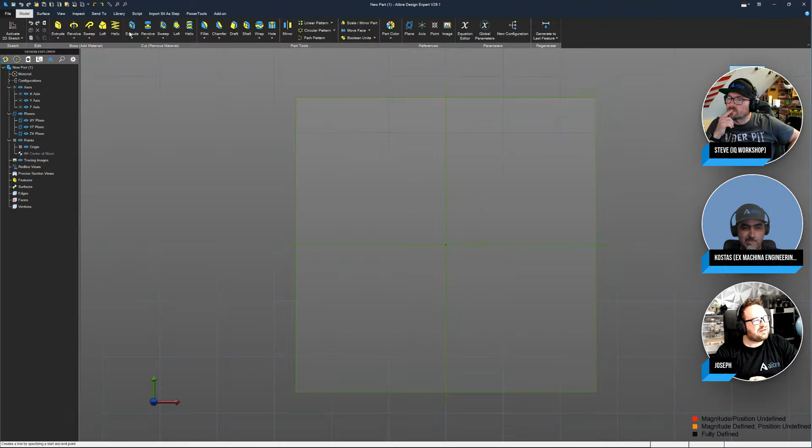I can go ahead and take that. So when I make a new part here in Alibre, create a sketch—I'm going to break some rules here and not fully constrain, just to get us to the point a little faster, so you don't watch me making meaningless things all day. When I create a hole, let's cut through that.

So there are really three kinds of patterns we can make. The first one is a sketch pattern. I can take this sketch and choose a direction and up the number of instances. So when we make sketch patterns like this, the recommendation is this is your last line of defense.

Sometimes the only thing you can do to get a thing to work is a sketch pattern, and that's why we have it. But if you can avoid doing a sketch pattern, avoid it, because sketch patterns mean we have to solve this sketch and then solve all the individual sketch elements, topologies, and constraints of every individual pattern, and then generate a feature off of that and resolve the feature. So things get heavy quick—it's like an exponential multiplier of solving.

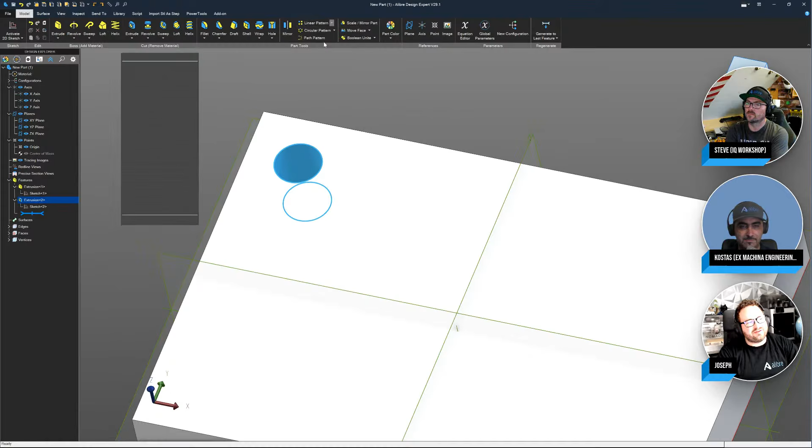So if you can avoid doing a sketch pattern, a feature pattern is preferable. But even more preferable—see in this option, we can come down to linear topology pattern. This is available in Expert; it might be available in Professional.

With topology patterns, we choose a seed face and a direction, then I can choose an offset. The problem with topology patterns is they are temperamental. We can generate a topology pattern here, and the advantage is this takes what we've already made and with minimal computational effort replicates it. But it's tied to very specific kinds of geometry, so it doesn't always work. But if you can do a topology pattern, you'll thank yourself later. They're simple, they're fast, they don't tie up your performance, and so on.

But when you have something that's more demanding, that's where our typical feature patterns come in. A feature pattern takes the individual feature and copies it, so you don't have the computational heaviness of resolving individual sketches every time for every feature. It does work a little bit faster, but heavy feature patterns can still slow you down in ways that topology patterns will not. Bill, I think you asked that question, let me know if that answers what you were asking.

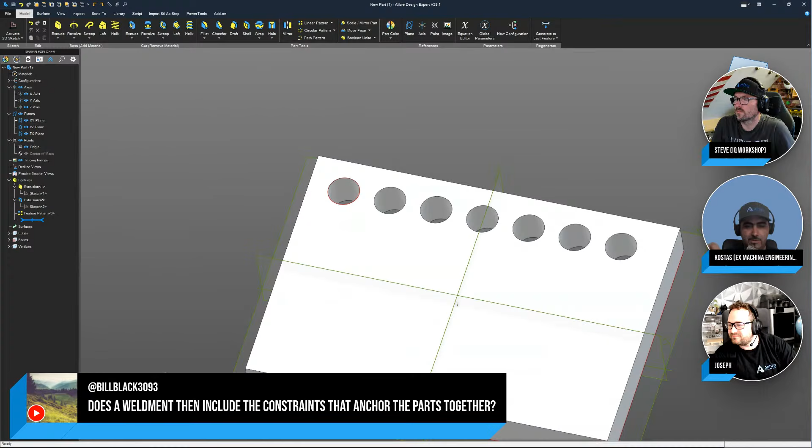So that's the hierarchy: topology, feature, sketch, in that order. There's another little difference I wanted to point out, which is a very edge case, but topology patterns cannot then be repatterned, that's correct. Whereas a linear or circular pattern can then be repatterned. So that's another difference there.

But topology patterns, when you have like thousands or tens of thousands of faces, are amazingly quick. There is a very, very noticeable difference. So if you saw, I just patterned that topology pattern, and thanks for that insight, Kostas.

We certainly can. And also, another thing we mentioned in a previous live, when you bring in a step file, the entire step file is a single feature, so you cannot do a linear pattern on it. But if it has a hole, you can do a topology pattern, or a pocket, or a distinct feature on it. You can do a topology pattern on that even if it is still a step file, or an imported file, which is also a great win for topology patterns.

Absolutely. So as you can tell, my OK button's grayed out. I can't pattern off of any of these seed faces, like you said, Kostas. So once you make a topology pattern, it's done, and that's another advantage of it.

I saw another question from Bill Black here: does a weldment then include constraints that anchor the parts together?

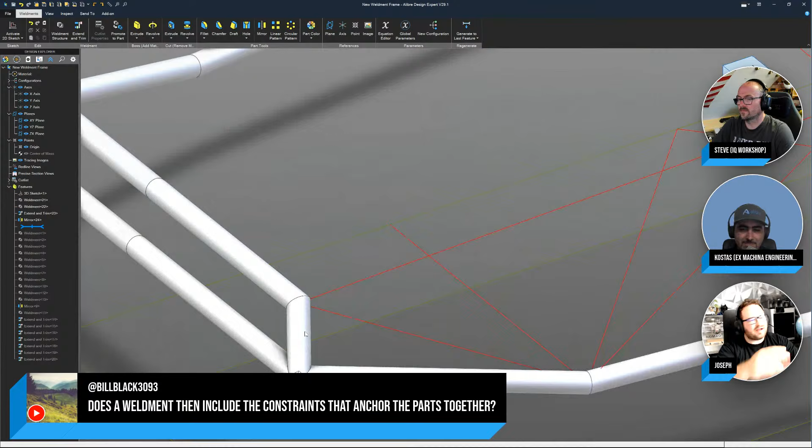Love that question. So these weldments don't have constraints in the assembly sense, so there's not going to be like a coincident or a coaxial or something like that. These are anchored by the sketch. So if I were to edit the sketch here, and I think I probably ought to get rid of some of this stuff that I added in, I can go and edit my sketch once I'm done recomputing my frame here. Then once I make this something different, maybe 16, all of the relationships between the parts, the trims, and everything just update to that new geometry. So you can tell I've still trimmed this pipe to the size and way that I want to, compared to everything else.

Hopefully that answers your question, let me know if I did, Bill, and thank you so much for the question there.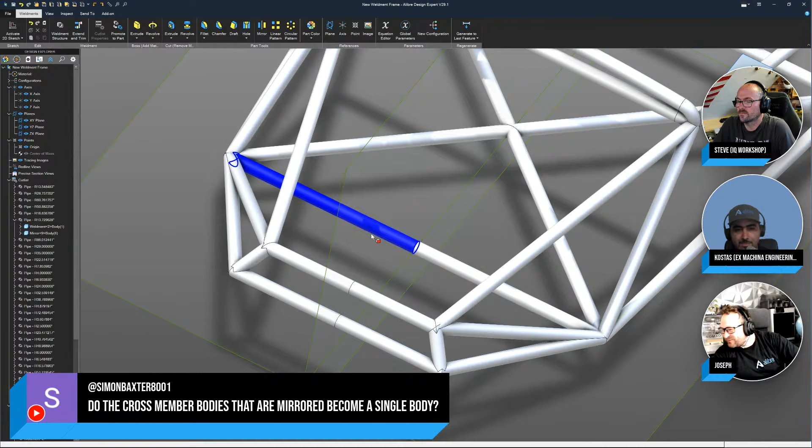Do the cross-member bodies that are mirrored become a single body? That's an excellent question. Let's see, it looks like, no, those are two separate bodies right there. So I think there's still some updating conversations on how we're going to unite bodies if we wish. If you have specific needs, this is Simon Baxter, please make your voice known in the forum, I really like that you do that, Simon. So we probably won't have a problem there. Let us know what you need with that feature, give us a complete and specific spec as you can, and I'd love to send that on so that we know exactly what you need.

Multi-body is only supported in Weldment, that is true, Cow Tools, thank you for bringing that up. As of right now, multi-body modeling is only in weldments, but I think there are some hints or indicators that this could leak into regular parts because the work is already largely done. So stay tuned and let us know if that multi-body modeling support is handy for your regular part modeling workflow. I know I use surfaces a lot to represent multi-bodies, and it would be handy for some of the things that I do. So Cow Tools, if you'd like to see multi-body, let us know, I'd love to see that.

How much of Weldments is influenced by Frame Builder, by Nate, LiquidGravity? I love that Frame Builder add-in that he created. From what I've seen, not much, but I think there were a lot of general benchmarks as to what would be expected for a good Weldment platform, working from there. Nate sure does have a really good contribution to Alibre, and that's a really cool thing he made.

Ah, awesome, Bill. Thanks for letting us know. So you've used sketch patterns for a very long time. Feature patterns are now the favorite, and maybe you'll find a soft spot for topology as well. You bet.

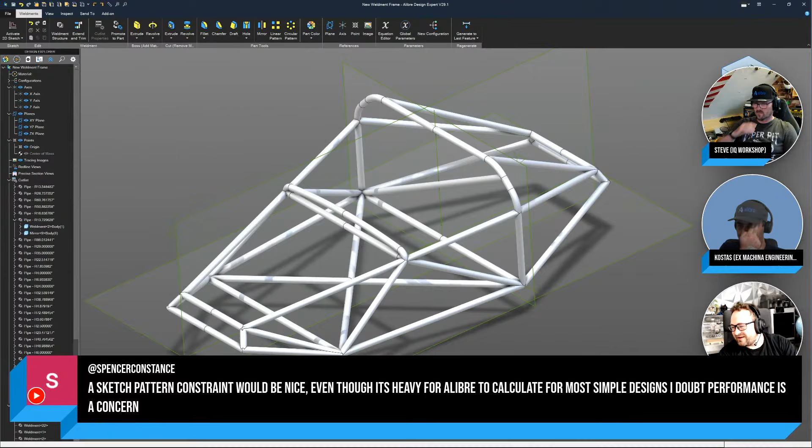Sketch pattern constraint would be nice, even though it's heavy for Alibre to calculate for most simple designs. I doubt performance is a concern. I agree. If we can get something with some automatic constraints when you pattern it, I'd love to see that enhancement too. So I'm grateful you brought that up. And Spencer, that's consecutive good ideas you've brought to us in this stream alone. We love hearing from you, and thanks for letting us know.

Absolutely. Well, I think there's a lot of ears on this, and it'll be interesting to see what people think is important and what we ought to be adding on top of this.

Hey, Stu 3D, thanks a lot. We're happy to help. What do you think? Does the frame look better with that narrower front end that I changed? Let us know in the chat.

Any other questions that I can get to while we have this new module up? Let us know.

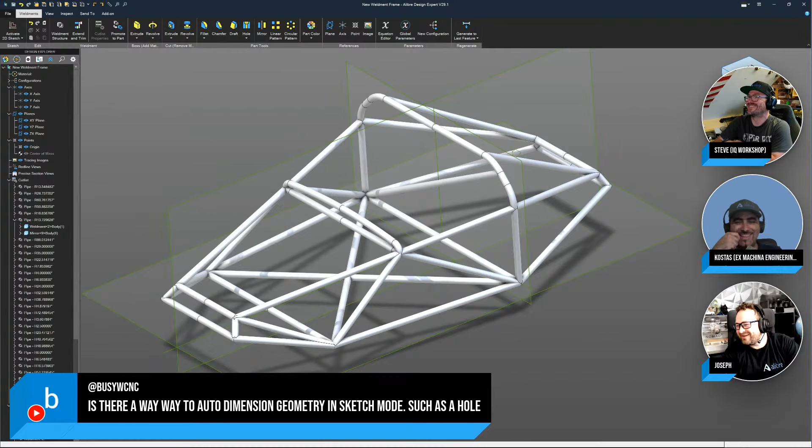Is there a way to auto-dimension geometry in sketch mode, such as a hole? Great question. So far, no, unfortunately. But maybe somebody's going to create an interesting add-on and add it to their memberships. I'm not sure.

Well, that's not a bad idea, actually. But can I just say, I already have a video on that called Design Intent and What Beginners Get Wrong When Designing, and so on. Dimensions hold a lot of design intent, right?

Because you can get the exact same sketch, every sketch element in the exact same position, with a lot of different dimension and constraint sets, and each set carries a different design intent, and it will behave differently when you change a parameter. So auto dimensioning, even the software that has it, I really hate it, because okay, you did it automatically, but

what's the design intent, right? What does D2 control? What does D3 control? So yeah, there's a lot to discuss there. Yeah, so that's a great thing to be talking about, because I'd love to see what users want for all that. And maybe Claude will make one for me.

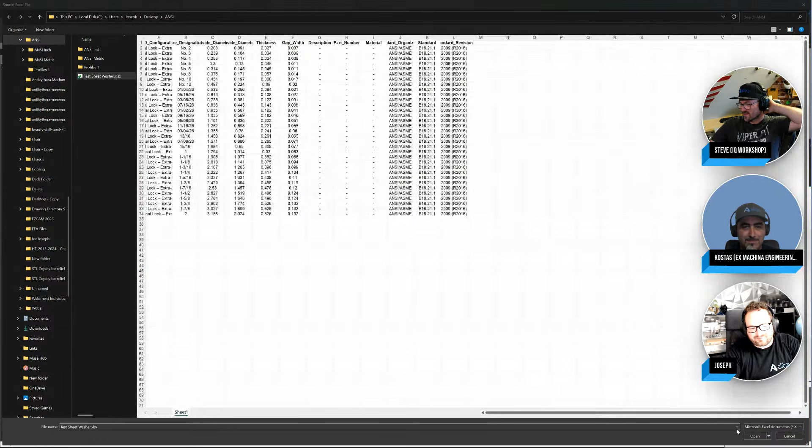okay. So on the Utilities screen, there's something that says Toolbox and Add Part from Spreadsheet. So we'll click on that, and it asks for your Excel file. And once you select an Excel file, that probably works. And then you, it imports the columns from your Excel file.

Exactly. And I think I'm just going to make a weldment washer here. So then you can choose what you want as your input. I think my dark mode might be throwing this off here. Let me change this to inches. Yeah, and we can call that text or part name, distance. What are we doing here?

So there we go. So then we can establish filter orders. This is more for assemblies, but it's saying in an assembly, if I want to make this part, I can say I want the user to have this option first, this option second, and this option third. And what we're saying is the user chooses the outside diameter first, then the inside diameter of the washer second, then the thickness of the washer third, and so on.

This looks like a lock washer that I pulled up. And this is filter order. So we're saying, hey, we're choosing from the spreadsheet dimensions. I also can take this back down to 0, and I can say the user can just type their own value here if there's a 1 in this column. And then we populate equations, and we actually model the part. And so what we do—again, I have a video on how to do all this.

And there's going to be some more video support when we release so that people know what they're doing. But just as a preview, we have all of the spreadsheet equations as variables here, and then we can just start modeling off of those variables.

And the idea is when I add in a variable and the user selects, say, gap width from their spreadsheet, then that's going to update to the correct value based on what they're choosing.

So once we have that file created, we save it, and then when we go to pull it into Weldments, boom, that's a Weldment profile. So hopefully that makes sense. Let me know in the chat if it does. Kind of a long answer.

Can I just highlight a comment which is exactly on the thing you were just saying? Imagine I want to make an aluminum extrusion of some kind, right? So if you want to use it in Weldments, you need to make it into a toolbox part.

I have actually two videos, one on toolbox, which I go into a lot of detail on what Joseph just said there, which was basically everything. It's just that I make a couple of examples out of everything. And then I have another one on catalog features.

Basically, if you want to do an aluminum extrusion, you can download one off the internet, get the sketch of it, dimension it, and in the Excel file, when you're setting up your toolbox, each column is going to be the different parameters that will be changing.

So if you download a 40 by 40 extrusion, the section does not change at all. So your only column would be length, and that would be a user input. So you do that, now you have that extrusion as a toolbox part, and you can use it straight in Weldments.

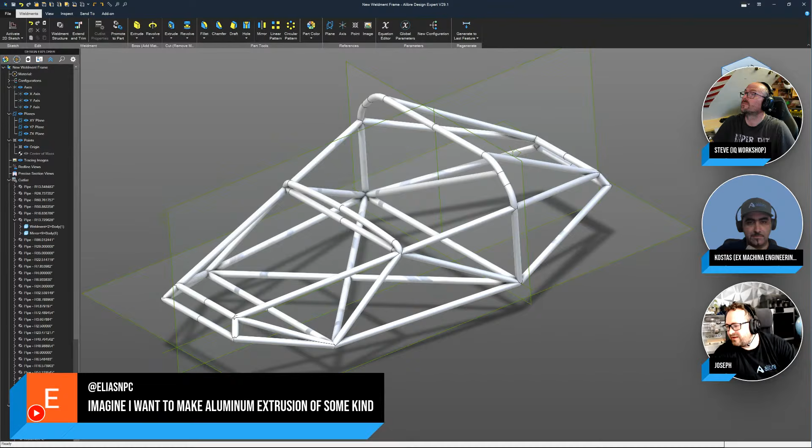That'd be a cool thing to ship with too, so maybe we should look into that. And thank you, Elias, we really appreciate it. There's a bit of a delay, of course, in communication, but that came right up for me.

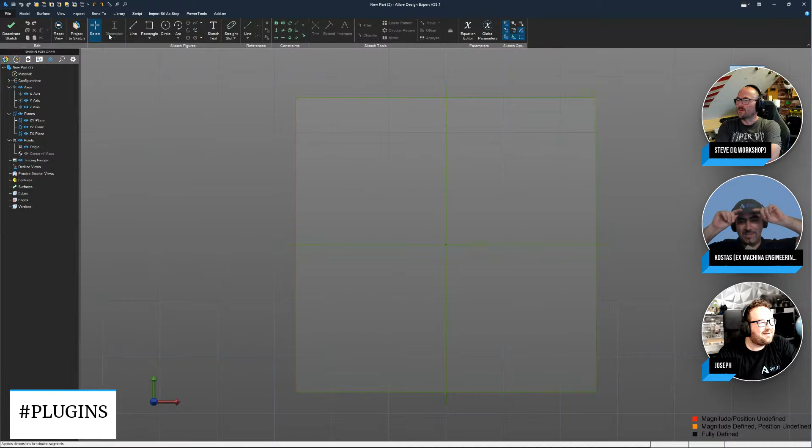I mean, you guys insist on making me hungry with these delicious breakfast pastries. Well, we hadn't mentioned tacos, and I had to find some way of threading it in. So there you go, tacos and Cinnabons. That actually sounds good together for some reason. All right, so a cinnamon bun.

Isn't a cinnamon bun the perfect Aristotelian spiral? I think it is, isn't it? That's pretty close. I think to make the rounded top should be a secondary operation, but I would probably do a revolve cut and get an angle there so it has the higher center, and then add the rounded top. But I think that's probably a reasonable concept, to base it off a spiral.

Yep, yep, it's based off an Archimedean spiral. I'm very sorry, Archimedean spiral. All right, LGRFBS, let us know if that satisfies your design need.

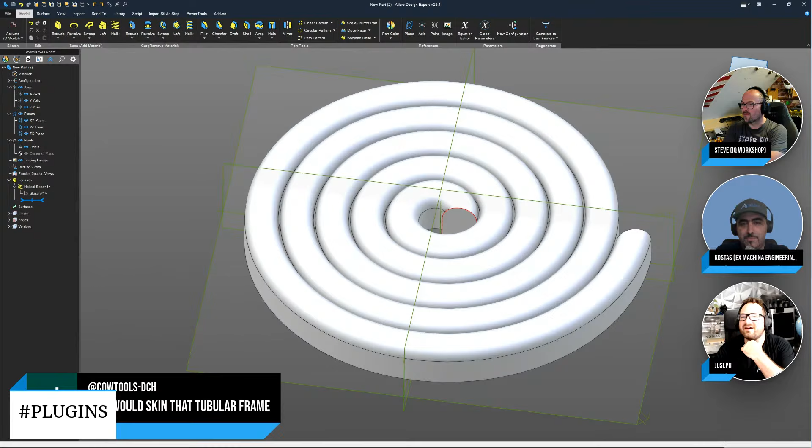How would you skin that tubular frame? Cowtools, do you mean actually create a body for it? That's a good question, actually. I'm not sure I'm following that question. Let me know what you're saying, Kostas. Maybe he means use the frame to create body panels for it. Oh I see, yeah, that is an interesting question.

Well, what I would do is I'd loft it, because body panels are curvy and weird, and I would just project the tubes in and use tangent lines, or tangent arcs, and create multiple lofts to go around the chassis. Look guys, designing a car body is never quick and easy, right? Never. It's one of the weirdest things you can design ever.

All I'm going to say is this, and I think this is probably all I can say. But Alibre, man. Oh come on. Alibre V30, you're probably going to have a lot easier time doing something like a car body.

It's going to have G2 continuity, G3 continuity, isn't it? It is, isn't it? I don't know, man, come on, I have no idea. Come on, man. Oh, that's Joseph. Why are you doing this to me? Because I love tormenting you. I mean, you do kind of, a little bit, don't you?

Let us know in the chat. Can Kostas get tormented? Can we get V30 in about a month? That's reasonable, isn't it? We'll see what we can do for you. I'll tell him to hurry it up. Yeah, okay.

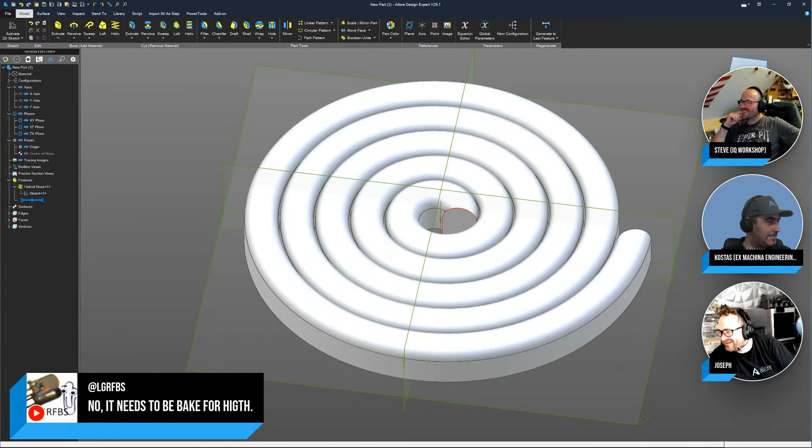And yeah, we'll see if we can figure out more ways to torment Kostas and still have him come on the stream with us. I'll come on the stream, guys, I wouldn't miss a stream. You know that, by the way,

the formula I gave you is a very, very close approximation to the golden ratio: 1 plus square root of 5 over 2. There you go, guys.

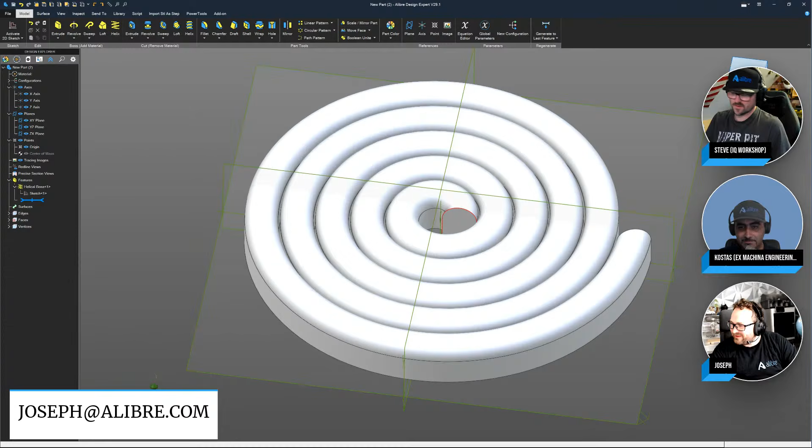Let's start it. All right, who's going to get Kostas's add-ons? Come on, guys. Oh, John Reamer! John Reamer, let's go. Congrats, let's go man, congratulations to this guy. Come on, man.

That's amazing. Take my text block out. Congratulations, John, send me an email and I'll send you. By the way, they come with installation files and instructions. So you read the instructions, you launch the installer, and it does the work for you. And I'm always open after you start using them to bug fixes and ideas, and I'd love some feedback. So, excellent, John Reamer, send me an email.

So appropriate to do all this with a Cinnabon CAD backdrop here. Of course it is, isn't it? Look, what you should have done, Joseph, is use your split face trick, right? And then painted the other surface brown because it's the cinnamon. I love it. I think I can, I think I might be able to do that.